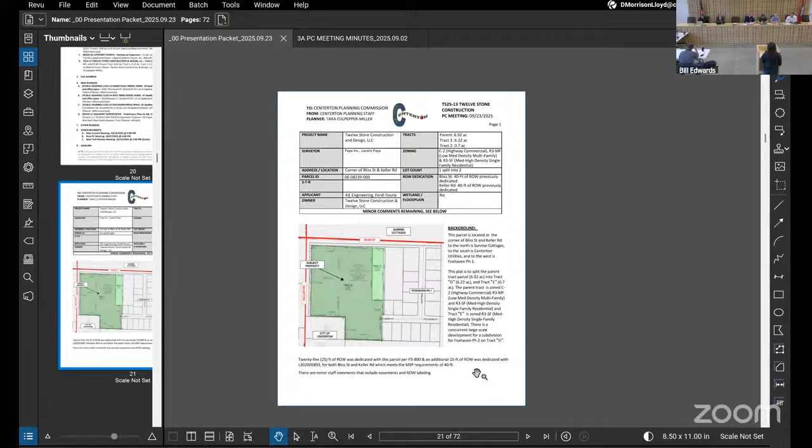They are wanting to use it as a model home and temporary sales office to facilitate sales within the new subdivision for 1 year. They are not doing any structural changes to the residential home, and they are also not going to be converting the garage into sales offices. So it's gonna remain as is. They'll just have people there, walk people through different finishes and things like that that they can do.

It is surrounded by single-family zoning and the Huber Place Phase 1 subdivision to the north and to the west. And directly to the east of this property, it is adjacent to C2 zoning because the parcels right there on Tycoon are commercial properties. They will be open for the model home for potential buyers from 10 a.m. to 6 p.m., 7 days a week.

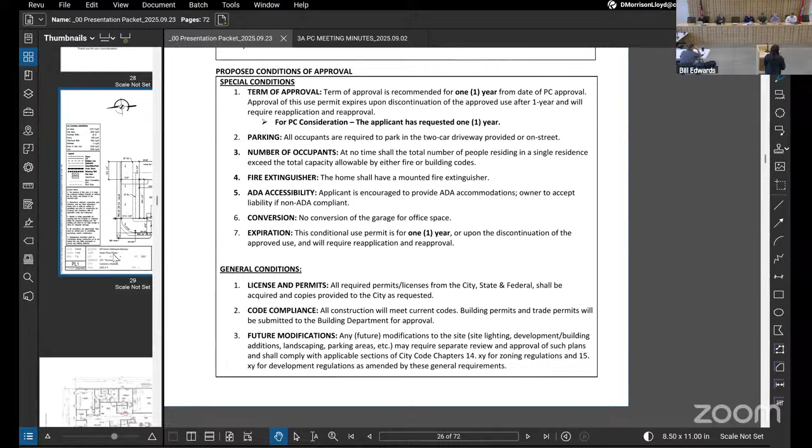Yeah, there's just a little bit else. Is it just considered one office or are there gonna be multiple people working there? We have about 1 to 2 salespeople working. That's about it. How do y'all normally handle the parking? We encourage driveway parking just to keep minimal cars off the street. But we're expecting maybe about 5 people in there a week.

I know we've run into some parking challenges before on there. Well, but people get the opportunity to come and complain, and it can be revoked. So, I agree with you though. But it is just one of the houses. There's not like 3 or 4 of them there. We're trying to reserve the last few houses surrounding the model home as window lots to allow parking.

Any other questions or comments from any of the commissioners before we open up to the public? Then I would entertain a motion to open the public hearing. I'll make a motion to open the public hearing. Second. Motion and a second. Is anyone opposed? We are now open to the public. If anyone has any questions, comments, or concerns in regard to conditional use 2513 for the Huber Place model home, we'd ask that you come to the podium, state your name, address, and any questions, comments, or concerns that you might have.

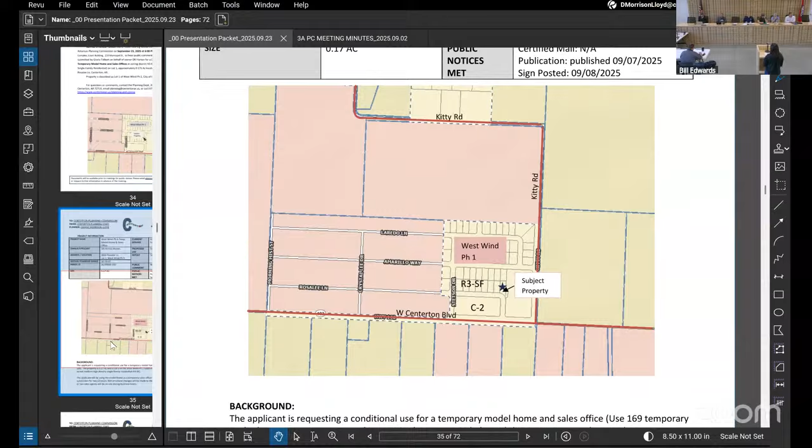Diane? Yes, this is a bit of a rinse and repeat, but they are requesting a conditional use for a temporary model home and sales office. It's located on lot 1 of West Wind Phase 1. It's 0.17 acres and it is zoned medium high density, single family residential. And they are requesting to use this as a model home for 2 years. Like the previous one, they're not making any changes to the interior of the house, and they are not converting the garage to be used as sales space either.

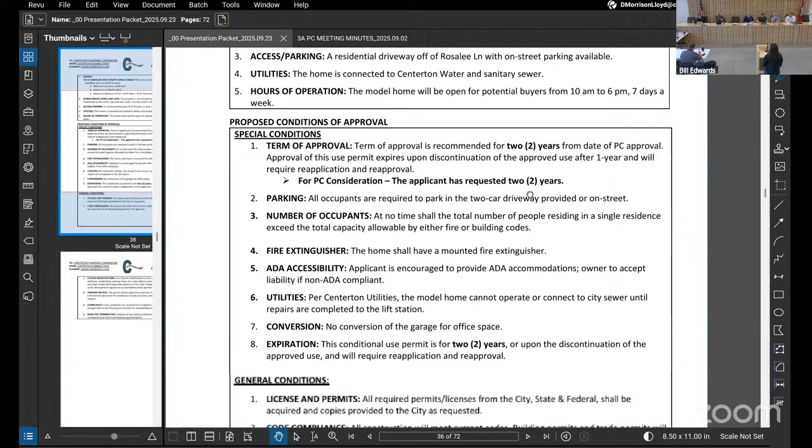So it is surrounded, of course, by single family zoning within the subdivision to the northeast and west. And like the previous one, there is C2 commercial located to the south within that subdivision. Parking, same thing, use the residential driveway off of Rosalee, with on-street parking available. There is one additional condition for this one for utilities. Per Centerton Utilities, the model home cannot operate or connect to the city sewer until repairs are completed on their lift station. Their lift station is currently flooding. So they're having to get all those repairs done before they can use this as a model home.

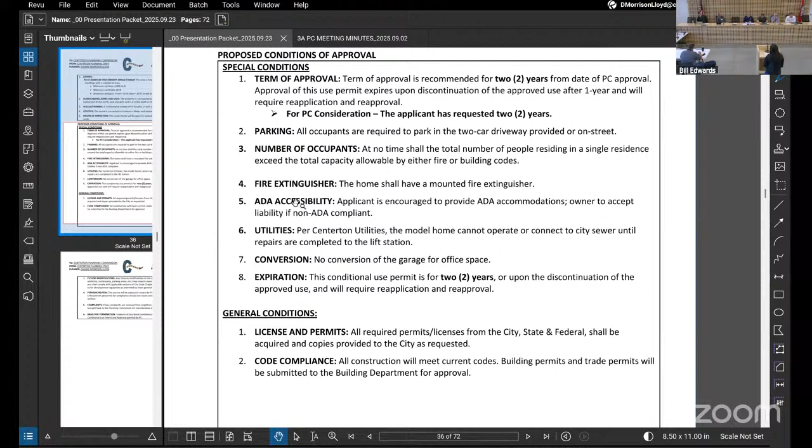And they are requesting 2 years for this particular home. And same hours, 10 a.m. to 6 p.m., 7 days a week, with 1 to 2 people staffing. So my only question or concern on this one: is Stetson Drive completed yet? So yes. It would be platted, right? Mhm. And so my biggest concern or comment would be parking, if there happens to be 3 or 4 vehicles parked there and it's on a corner. And it looks like a 90-degree corner, plus it's at an entrance.

I was trying to see how long that is to the entrance to the street. I wonder if we need to consider maybe restricting parking, if that makes sense. So if it's only 20 feet, and I don't know what that is, it's probably longer than that, but do we need to restrict parking if people turn in? You probably definitely don't want to be parked right in that curve. I think those commercial lots, are they 50 foot? I'm probably guessing, no, I think they're about 150 feet deep. Yeah, let's get a double check.

Because then it looks like there's this little, looks like you got it. Then there's a lift station in that little wonky corner there, and then the large parcel to the right is their pond. Yeah, I just think we should somehow try to limit, does that make sense? Yes. So I think we should, I don't know if it's 100 feet or I don't know what people feel comfortable with, from the entrance.

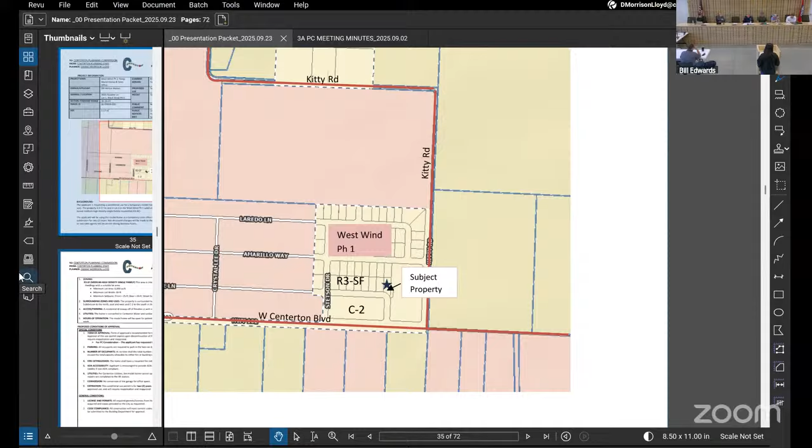We should probably limit. You're not gonna be able to block off the lift station access either. Correct. That's my feedback on that. You all own the lot or lots next door? Yes. Minus the lift station lot. Sure. Well, I say that, not the commercial lot either. The residential. Yes.

Any other questions or comments from any of the commissioners before we open it up to the public? I was just gonna say, I looked down at the plat, farther down there, that lot that we're talking about is 142 feet on the east side. So using that for scale, you're probably a couple 100 feet from that intersection. Okay. Yeah, I just, if 5 people show up, I just don't want, yeah, no, I get what you're saying. Plus it's on that corner, and I know it's probably not to scale and probably looks sharper than it is, but still just want to be conscious of it, I think, for flow of traffic.

If there's no other questions or comments, then I would entertain a motion to open the public hearing. So Joey, I'll make a motion to open the public hearing. Second. Motion and a second to open the public hearing. Is anyone opposed? We are now open to the public. If anyone wishes to speak in regards to conditional use 2514 for West Wind Model Home, the single family dwelling unit at 3010 Rosalee Lane, I ask that you come to the podium, state your name and address. Any questions, comments, or concerns?

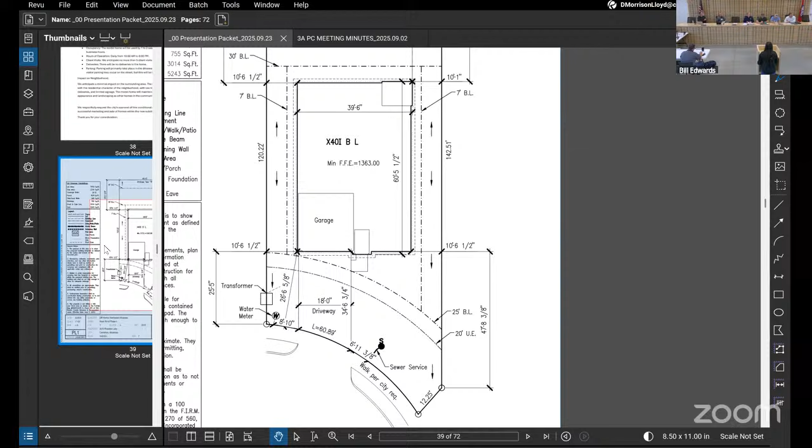Are y'all building out the rest of the residential on this, or do you? The developer is. We purchased these lots from a developer and are just building on them. So they're supposed to be working on that next phase for us. Gotcha, okay, so that's why the 2 years, you wanna kind of roll it. We want to leave it for the future phase. Yes, so we wouldn't have to move. Yeah, that makes sense. So I just want to make sure, so you're comfortable?

I don't know, how would we prevent people from parking? I don't know if it's a temporary sign while you guys are open. I'm open for suggestions and maybe you guys don't think it's a big deal. I just, if 5 or 6, 7 people, for whatever reason, start lining up on the street, if you're 30 foot of vehicle and 6 of them get in there, it adds up. So I was just throwing it out there as something we should think about. Do we draw it at 100 feet from the entrance and then ask them to put a sign up? I'm open for ideas and suggestions, I guess, is where I'm at.

Commercial lots are 150 feet wide, so the lot is more than 150 feet away from the entrance. Okay. Mm-hmm. I see that they could park along the north side of the commercial lots. Yes. Is that a hydrant also in that corner besides the lift station? There's probably, I don't know if there's no parking signs there already, but there should be something that doesn't block them.

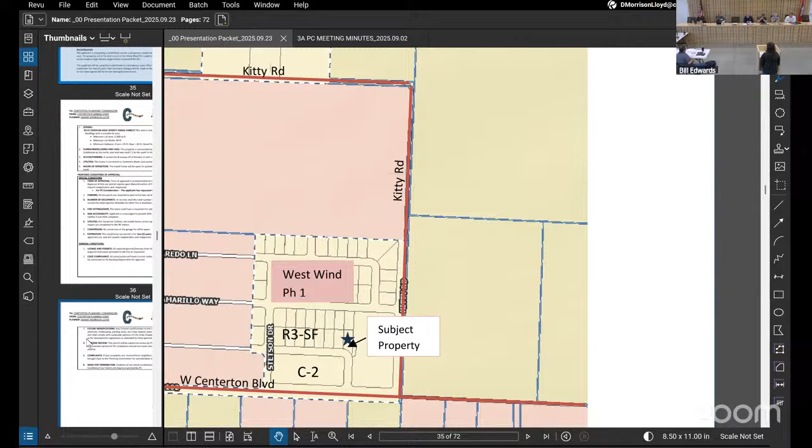Signage too, making sure that there's signage there then. Does that need to be a part of this approval? I mean, I'm comfortable without it. I just think it's noted, and I'll make a note in the approval letter that I send to them. I will make a note about parking and to stay away from that.

So with that, I would entertain a motion for conditional use 2514 for the West Wind model home. This is Joey. I'll make a motion to approve conditional use 2514 West Wind model for a 2-year duration and note that there can be no connection to public utilities until there are repairs on the lift station. You second. Brandon, a second. All right, motion and a second. If you'll do a roll call vote for me, please.

All right, next on the agenda this evening is also a public hearing. This is for conditional use 2515 Fox Haven office space. It is a single family dwelling unit as a temporary office space. It's at 610 Whitten Road. It is zoned R3 single family, and this is lot 14. Give me your name, and then walk me through what you guys are requesting.

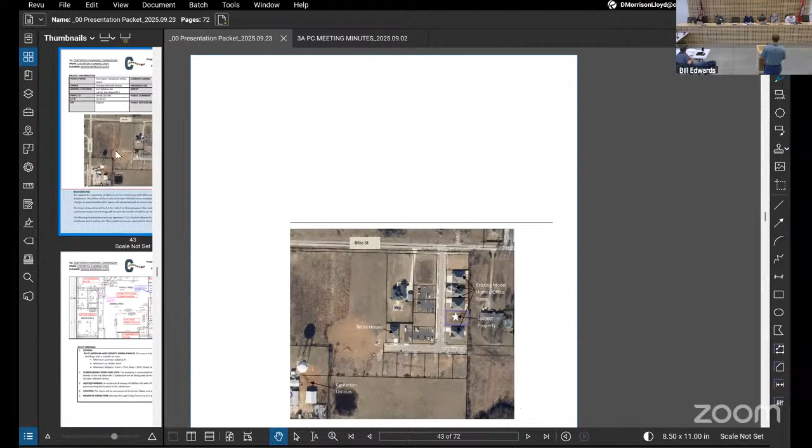The office will be used by internal staff with 5 to 10 employees working on site daily. From time to time, we may host internal meetings with attendance reaching up to 15 to 20 people. No customers will be received at this location. For parking, we will be accommodating staff through our lot driveways and existing paved parking spots. Those have a total of 60 between the two paved parking lots, and with the lot driveways it would be 66 in total. So a little different than the previous two.

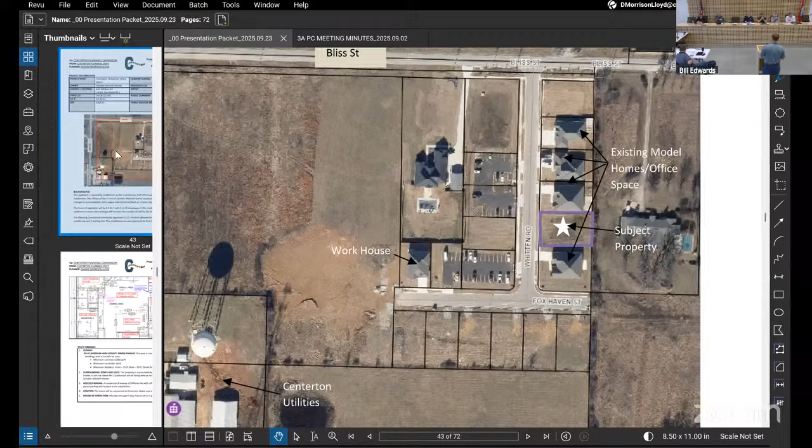So Diane, will you go through the staff report, please? Yes. As Trevor mentioned, this is in the Fox Haven subdivision. It is lot number 14. The office will be home for Schuber Mitchell's staff. In the interior, they are making changes to accommodate office space until it's converted back to a home. I do have a drawing of everything that's being converted included in your packet. Their hours of operation will be Monday through Friday, 8 AM to 5 PM, with 5 to 10 employees in the residential structure. There are 2 conference rooms, and meetings will increase the number of staff to probably about 20 at a time, and no customers will come to the home.

The planning commission has previously approved conditional use 2214, which allowed for 4 model homes and office space, a workhouse, and 2 parking lots. The conditional use was approved for 5 years, from 2022, expiring in 2027. It is surrounded by R3 single family on all sides. The 5 homes currently in the Fox Haven subdivision are being used as model homes and office space for Schuber Mitchell Homes, and staff vehicles get parked in the southern parking lot. It is Monday through Friday hours of operation. And of course, they have the residential driveway off Whitten Road.

And then there are the 2 paved parking lots, which Trevor said can hold 66 vehicles, and both parking lots are lighted. They have not requested a time period for the use. Staff suggests no more than 2 years; I'd love to match the existing model homes. But like I said, right now, everything in this subdivision is being used for a commercial use. And this one will be just strictly office space, not even a model home.

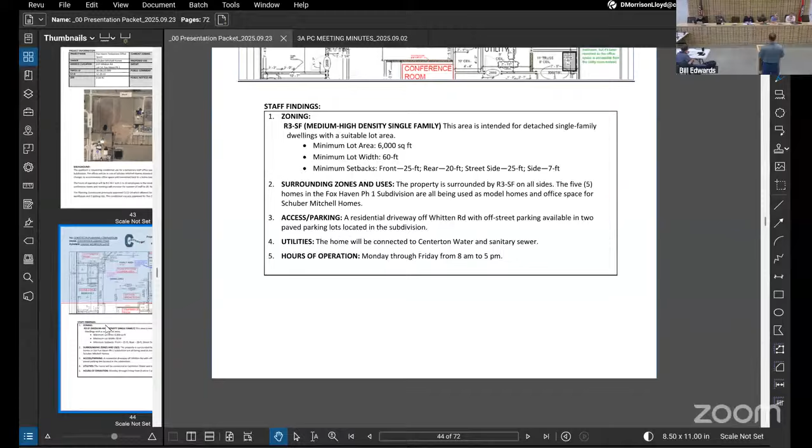So this house is not built yet. Correct, yes, sir. When do you anticipate construction starting? Tomorrow, if we get the approval. We're ready to rock. Okay.

This is all that's done on the subdivision. Sorry, that's what I was about to ask. Yes, that's all that's in there right now. So help me understand a little bit. Is this a commercial property now? No, sir. This will just be an office space that we use. Well, would that be commercial technically? That would be commercial. The conditional use is for commercial use. Yeah, so how does that impact?

We typically see one like standalone, right? Like what we just saw, but now we have a whole conglomerate. So the other existing model home office space that's already currently there, I'm asking the staff this question, are those considered commercial properties as well? None of this is zoned commercial. Correct. They are using it as commercial. In their model homes, they have office space also. They also have a workhouse where employees come.

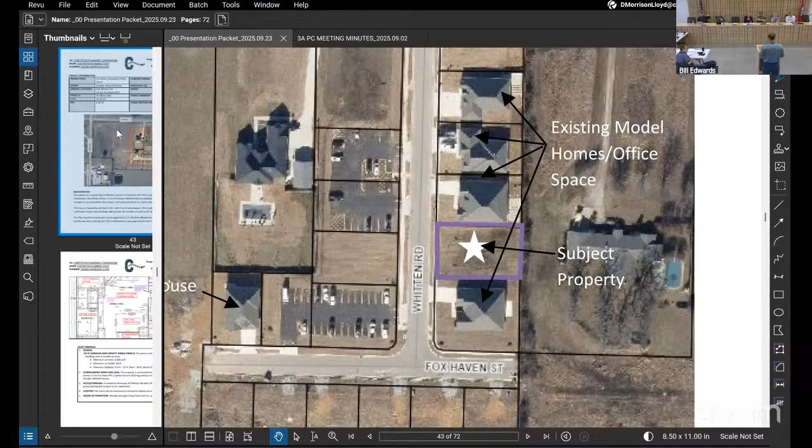Do you have a lot where you keep equipment? Yes, ma'am. Storage? That's the workhouse. So right now we've got multiple spaces that are being used for commercial purposes in a residential area. Yes. Okay. With the model home, historically, has there needed to be a conditional use permit of some kind for that? Anytime for a model home, yes, because it changes the intended use. And we can put conditions on it, whether it's hours of operation, parking or other things.

And so that's the reason that we require the conditional use, along with the fact that if there happen to be issues, then it could be brought before us. But historically, these guys have actually had model homes before in their subdivisions in which they would have a small parking lot. There would be 2 or 3 people working there, like a model home. Now this, in my mind, is strictly office. I don't want to speak for everybody. My thoughts are this is a subdivision.

And there's office space around town, whether it's Centerton or other places, that exists today versus waiting 3 or 4 months for construction of a property that's strictly driven towards office that doesn't accommodate normal parking. If we were going to build an office space for 20 people, then we would require a certain amount of parking for 20 people along with some other things. That's just me speaking. But I will open it up to the other commissioners for questions or comments before we open it up to the public.

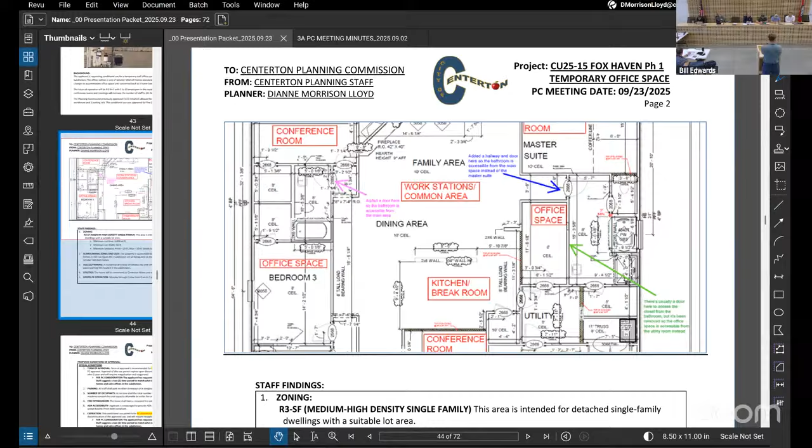I'm wondering, would fire marshal sign off on something like this? I bet Paul's excited. I can see it.

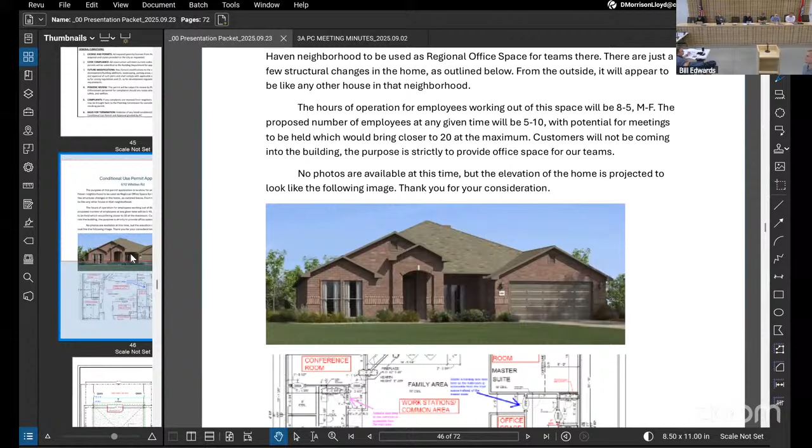So the way we view this is it's a business occupancy. It's under 49 occupant load, so the code doesn't really address it. The only thing that's required is a fire extinguisher. They don't even have to have exit signs and emergency egress lighting. Even when there's 5 right next to each other, they're independent buildings. Now, if they were attached, that would be obviously different. But since they're separate units, we view them individually.

Have you all had any issues with that? Have you had any issues as far as access? No? Not in this area, other subdivision. Any other comments before we open up to the public? We'll have more time, Brandon, don't worry.

Question. Is there any intent to look for commercial space and turn these back into residential at the end of 2027? Yes, ma'am. They will turn back into residential. We're in active talks right now on a commercial space along I-49 that we're looking into, that whenever 2027 comes, we'll all be moving to.

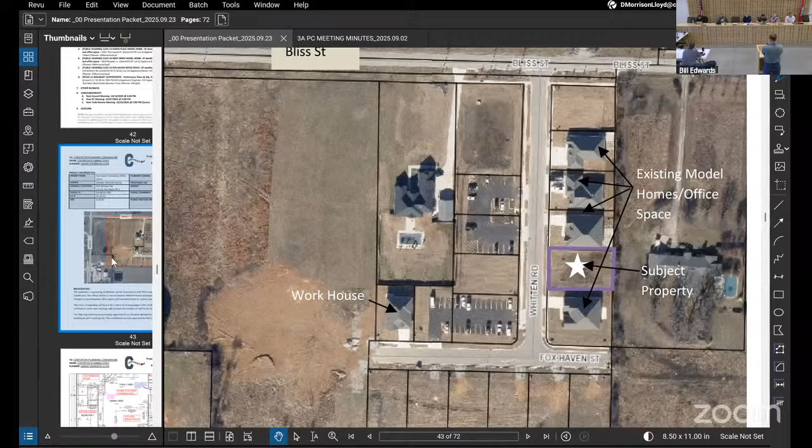Well, usually we look at the impact on whether we do individual mailings. We probably should have done those 2 since they're adjacent. It wouldn't really affect anyone else there, but I think we looked at it that they own all the lots. And who's the developer across Bliss? Gosh. Yeah, the Skyline Cottages. They own all the stuff to the west. That'll be Fox Haven phase 2.

How many total lots will be in this subdivision when it's all said and done? Do you remember that? Is it just those? One is a detention. Right. The front one's a detention. Hold on. There's 18, I think.

I think what I'm struggling with is model homes with a couple of staff there manning that is typical. And we vote yes, and we move with it. But even if I didn't know their circumstances, someone coming in and saying, we want to put a home in there and we want to office 20 people out of it, I don't know that I would say yes to that.

I wanna help because it sounds like y'all are in a bind. But at the same time, I don't know that I would vote yes for that if I didn't know your circumstance. Am I communicating that clearly? Yeah. I think, with these being their model homes right next door, they've got a vested interest to keep it nice and make sure there's parking and it's not a mess, because it's affecting their potential buyers. So I think there's some security for us in that way.

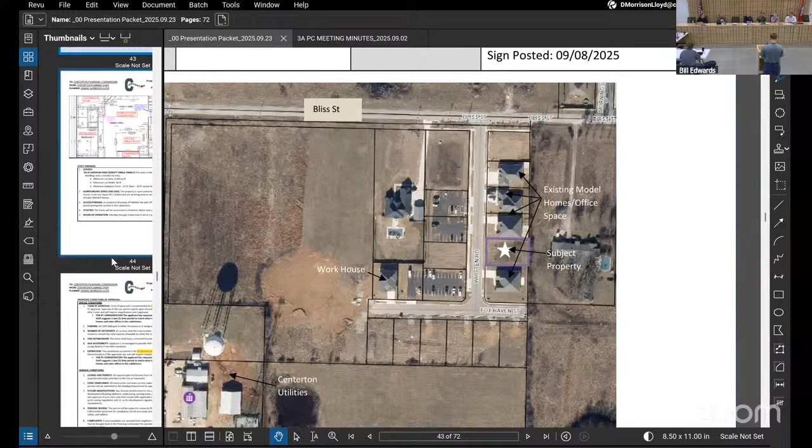I don't necessarily disagree with Brandon on the precedent either. But we'll all get a chance to vote here in a minute. Are there any other questions or comments before we take a vote? Then I would entertain a motion for conditional use 2515, the Fox Haven office space, single family dwelling unit as a temporary office at 610 Whitten Road.

This is Joey. I'll make a motion to approve conditional use 2515, the Fox Haven office space, with the duration to expire with the existing conditional use on the existing structures on February 7th of 27.

Second. I have a motion and a second. If you'll do a roll call for me, please. Joey Engel, I'm going with yes, because the entire subdivision is essentially locked down until this conditional use is up. Devin Murphy, yes. Tony Davis, yes, with the same reason that Joey stated.

Brandon Swoboda, no. Out of precedence. Curtis Ramsey, yes. Jeff Seifarth. And I'm a no as well. 4-2. It passed. Thank you and good luck. Yes.

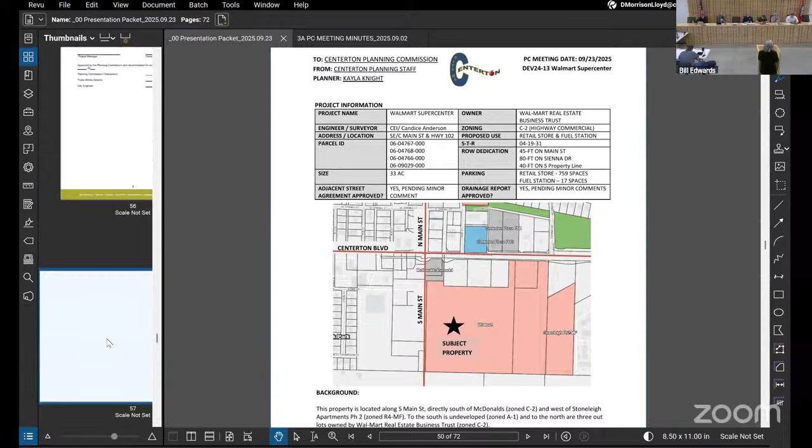The applicant is also proposing a fuel station and convenience store with a floor area of a little over 1,600 square feet. This property is zoned C2 highway commercial, with a front setback of 50 feet, street and side setback of 10 feet, rear setback of 25 feet, and C2 zoning does allow both fuel stations and retail stores by right. Both buildings meet setback requirements.

For utilities, an 8-inch water line will be constructed on the west side of the proposed Sienna Drive to service this property, and an 8-inch sewer line will be constructed on the east side of Sienna Drive to service this property. Additional utility changes may be needed in the future to coordinate utility relocation for the ARDOT widening of Highway 102, but Malcolm was confident that any of those changes wouldn't require site design changes, just little shifts in some easements, so he was fine with it coming to planning commission for preliminary approval. He does have some other minor comments on the plan, but they were substantially approved by Centerton Utilities.

As a note, this project will be placed on the sewer priority list based on the date of PC approval, the date when all staff comments are addressed, and then when all ADH comments are addressed. Just like every other project we've approved that's been held up by the sewer capacity situation. So that's how we've been handling it. We should have a list available soon for the public.

Bear with me, the drainage, floodplain, and wetlands is going to be lengthy because our city engineer's not here, so he provided all of this wonderful information. So, the Walmart development has been reviewed as meeting the requirements per the Centerton Drainage Manual. The site will consist of 2 ponds on the east side of the site near the extension of Sienna Drive, and will discharge to the northeast corner of the site, where flow will go under Highway 102 to the Centerton Pond and eventually continue northeast through McKissick Creek.

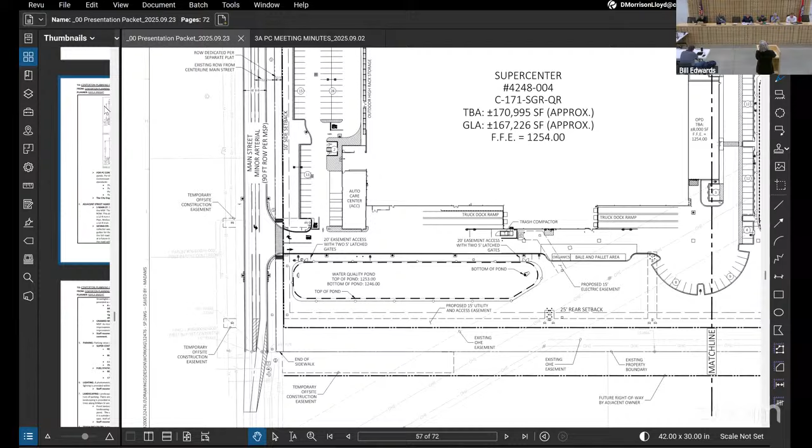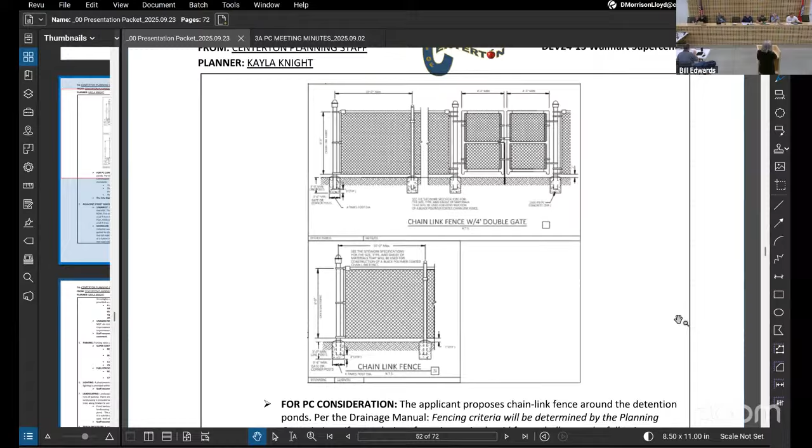Both ponds are designed with safety fencing around the ponds with access gates as required per code. The design for the fence in the drainage manual is still set as something that the planning commission can set. Current proposal is for a 6-foot silver chain link fence as shown in the details. This is acceptable for engineering purposes, but it's up to you guys to determine the actual design criteria. So that's up for your guys' consideration. As planning staff, we would recommend at least black chain link, if not something more stringent. The city engineer has approved the drainage for this development.

For the adjacent street agreement, South Main Street is designated as a minor arterial with a planned right of way of 90 feet per the master street plan. This development will dedicate an additional 12.5 feet to provide the total 45 feet of right of way. And then they will develop the road to provide the 38 feet back of curb street section, including a 12-foot turning lane, 2-foot curb and gutter, streetlights, and street trees. And then per the master trails plan, McKissick Spring Loop is planned along South Main Street. So this development will construct a 12-foot trail along their property.

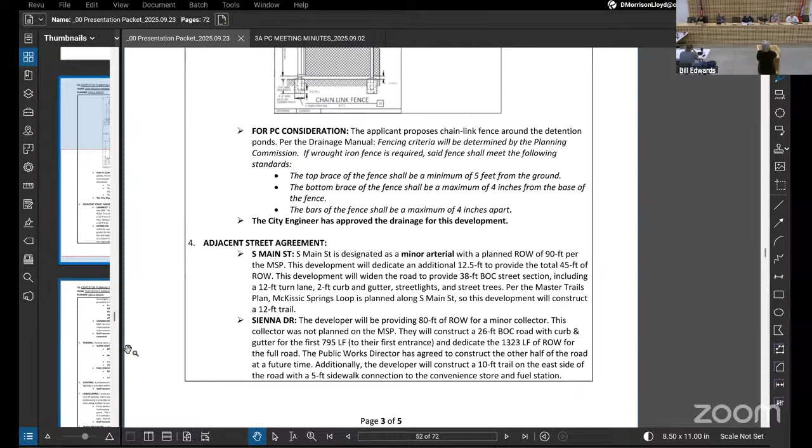For Sienna Drive, they're doing an extension of Sienna Drive along their property. So they'll be providing 80 feet of right of way for a minor collector. This collector was not planned on the master street plan. So they'll construct the 26-foot back of curb road with curb and gutter for the first 795 feet, which is to their first entrance, and dedicate the right of way for the full road all the way down to their property line. The Public Works Director has agreed to construct the other half of the road at a future time.

Additionally, the developer will construct a 10-foot trail on the east side of the road with a 5-foot sidewalk connection to the convenience store and fuel station. Streetlights will be provided every 200 feet and at every intersection. Street trees will be provided as shown on their landscaping plan.

Just as a note for you guys, a signal will be installed at the intersection of Sienna Drive and Highway 102. For ArDOT, additional improvements to Highway 102 are required to allow for this signal, including all of the entrances between Sienna and North Main Street becoming right in, right out only entrances with a painted median, I believe. And those preliminary plans are in the Dropbox. They've been in there for the last week and a half for you guys to review.

And then there is an unnamed minor collector along the south property line. So they'll dedicate 40 feet of right of way to meet the master street plan. As recommended by the city engineer and public works director, no other improvements or fee in lieu are being proposed for this road due to the number of improvements being completed on Sienna Drive and North Main Street. Staff recommends approval of the adjacent street agreement pending one minor comment.

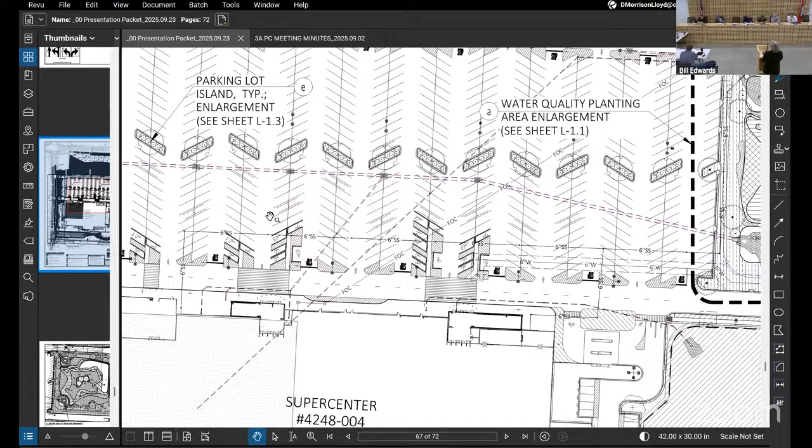A photometric plan was provided, and adequate lighting is provided for the site. Parking lot lighting is provided within islands and on the building, as well as along the roads and at entrances. Landscaped islands are provided in the parking lot, about every 10 to 11 spaces to break up the long runs of parking. Please keep in mind this development was submitted before Title 15 got enacted, so they didn't have the full code to have to adhere to. I think they did a pretty good job though. There are a few areas of 12 to 14 runs of parking without an island. Additional landscaping is provided within detention ponds, preserved wetlands areas, and along the streets.

The trees along North Main Street are provided outside of the right of way due to utility conflicts. Pond landscaping is shown per the landscaping plan. There's no additional pond landscaping beyond the extensive requirements for the marsh pond on the north pond. And then the south detention pond has trees shown along the south and east sides where it's outside of the 100-foot easement. No landscaping is shown on the north and east. And then half of the east side pond does not have landscaping due to the stormwater.

Staff recommends approval of the landscaping plan. A trash enclosure will be provided for the fuel station and will be made of concrete masonry blocks with a metal gate, and that elevation was included in your packet. The supercenter will have a trash compactor on the south side of the building. There are minor outstanding comments on the plans and adjacent street agreement regarding labeling, so we recommend any approval given be contingent on staff comments being addressed. Happy to answer any questions.

What have we got? So there's about 9 drives on the north side of 102 that'll change to right hand only. Is that right? Yeah, that's what they've been working on. That's what ArDOT is requesting, that they're only gonna be able to turn at Sienna Drive. It's a right in, right out. You can't even turn into them except the bank? Was there one that they could turn into? Oh, wait. If you're heading east, you can turn left. It'd be a left out.

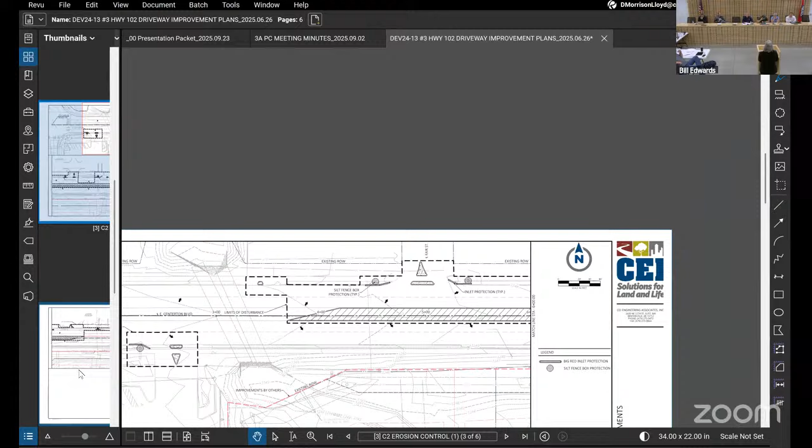I think they can turn at Fair Street. Was there one place they can turn? I thought it was a street. Fair Street, I think they can turn at Fair Street, because Alan came over and talked with myself and Chief before he approved. Unfortunately, that back road, I don't necessarily consider it a street. I know it somewhat is. It's actually a street, but they're looking at making improvements to it also.

Candace, thoughts on the color of the fence other than a gray metal fence? My own personal thought is, we're working with what is applied in the Muni code. No, it's up to the PC. So you're asking about the chain link versus the wrought iron? Yeah, basically. I'd like to see something. I don't know that we specify wrought iron.

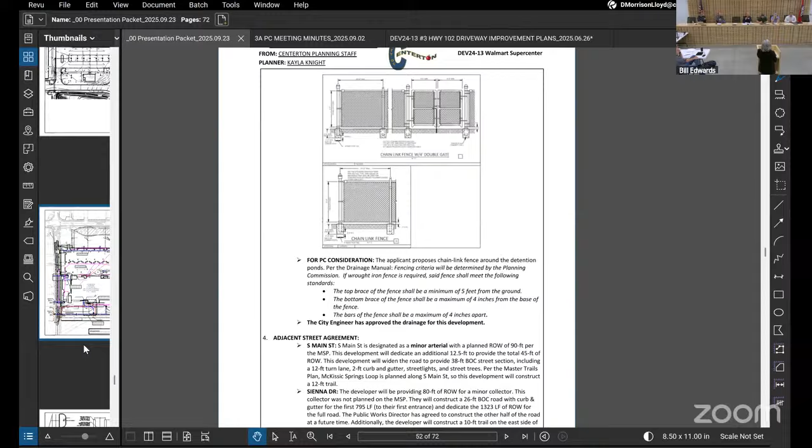In the wetlands, we do have significant shrubs and trees, so it helps to enhance those areas a little bit more. I don't think we're necessarily talking about screening, just the look of the fence. Paint it black, it just disappears in the landscape. Black chain link sounds crazy, but you can go to Sam's Club and see that. I don't think chain link. Let's keep it pretty. Only thing with the wrought iron is sooner or later somebody will hit it with a mower or a truck, and then you've got a big damaged panel, if they back into it.

It doesn't necessarily have to be wrought iron, but it can be one of the decorative vertical styles. Just throwing that out for consideration. Would you be open to a combination depending on whether it's seen or not seen? So let's say it was all black. Some could be chain link where it may be more hidden versus decorative where it's more visible. From the roadway, yes. Definitely visible. Is that something that y'all could live with?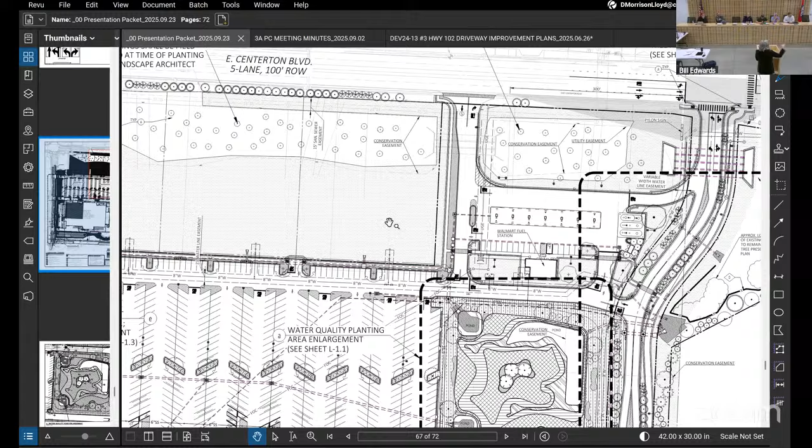For just the areas with the fence lines, and not the wetland adjacent to 102, because we did not propose fence at those two. Just whatever's required. Just where you're showing: the two ponds and then the pond diversion on the side. We're just saying decorative, saying black. Does that work? Try to get the whole side up here for you. I'd say black. Keep it pretty.

All right, I gotta ask. Thank you for the islands in the middle. I understand the striping by all the ADA areas down on the south side. I totally get that. But what's the thought on just striping the ones on the north side? Would a curb not benefit and add some protection to the signage and the lights that are proposed in there? I don't know specifically which ones you're talking. The ones on the north drive, they're all striped. Between the north-south parking and that head-end parking, those where your cursor just was.

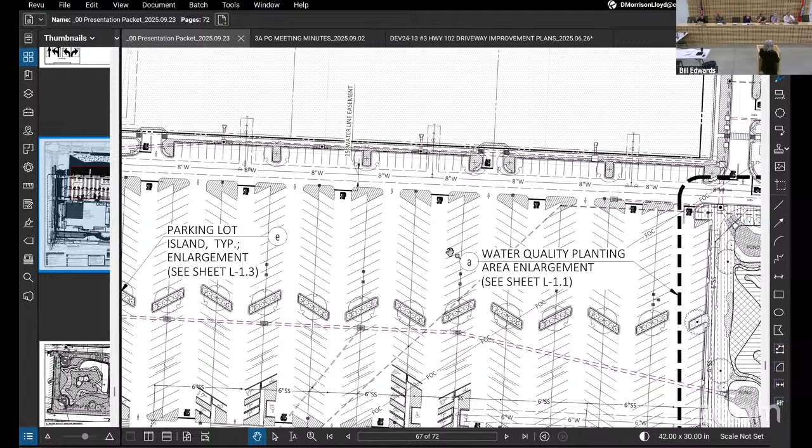The planning staff agreed with our islands because we previously had a few random islands on the north side and the south side, but in order for us to add the additional parking and expand our parking lot, we just put the landscape islands in the middle. It was more of a breakup for the sea of pavement along the parking lot. I just think as your main drive in off of Main Street, that would look a lot better. Well, they originally had come with that, and y'all talked them out of it? Yeah, it was either ends or in the middle. Not necessarily, in order for them to get their parking spaces.

I don't have a problem with how they have the parking design at all. Maybe it's just my opinion, but I think it would look better. That's all I'm gonna say. I kind of like it clean, striped on the ends. You would prefer to have landscape? Correct. I think it would define that drive. It's just painted right now. Oh, okay, I'm following you now. That's painted, not landscape. The only islands are those skinny ones in the middle. Thinking about people cutting the corners too, and visibility for people driving out of that parking lot. You could plant your trees where they don't have limbs way down here.

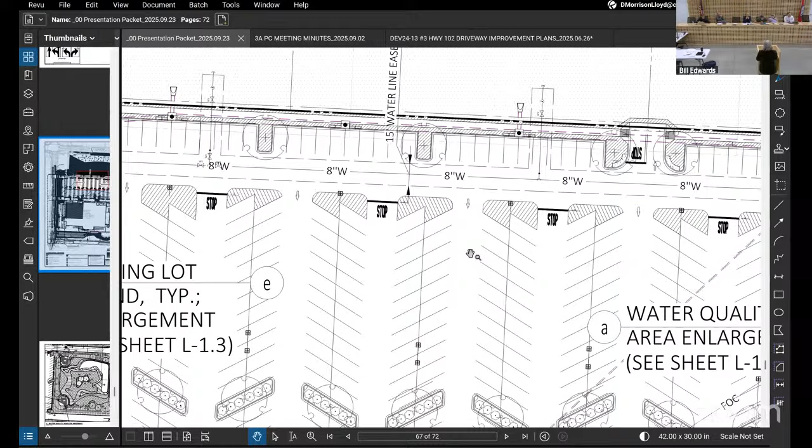One thing that they had proposed before is every other one, so that it kind of defined it. I would be open to that. I think that would look better than the whole row of stripes. I agree. This is under the old Title 15 code. But the old Title 15 says we can; it does require parking. Yeah, you can require. I'm open to every other one. And frankly, on the south, I completely get it, for pedestrian ability.

Hi, Will Kellstrom here on behalf of Walmart. I've talked to him about this landscaping issue, and I think I talked to you on the phone as well, Joey. Earlier we had them alternated, and I did ask why can't we just turn those stripes into grass? If you leave them exactly the shape they are, some of them will be so narrow that they'll be difficult to plant and may not even look that good. What if you round them off and make them square? Then we're cannibalizing spaces.

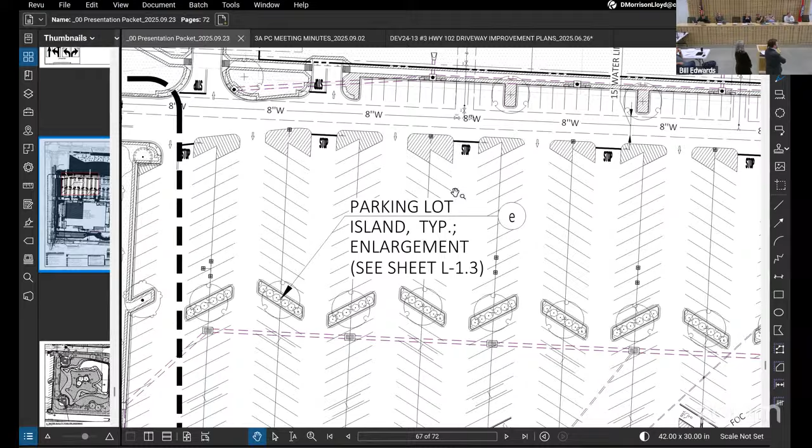Can I interject here? I've done civil site design for 20 years. The only thing you're gonna do is curve the hard 90-degree edges on the interior of the parking stalls, where you would turn into it. You're not gonna lose any stalls. You put like a 3-foot radius on those hard points, and they've already got them radiused on the outside edges. So I really don't think you're gonna lose any parking stalls. Walmart also maintains internal policies about how they want their parking for safety and operational efficiency.

Well, I mean, I'm just saying, it's more difficult to, trust me, I've on multiple occasions said, why can't we just plug that thing in there? No, so we worked through a bunch of different scenarios with this, and in order for them to have landscape islands up there on the top that look nice and are efficient to maintain and don't die, we will have to cannibalize some parking.

How do you not have issues with the smaller ones in the middle if you're saying these are too small up top? And they already came with these to staff, I think, completely curved on the top. So that was the original ask. I think every other one, I think that's a fair ask. Talking about on the south side, that point in the middle of the island. When you make that a radius, is that what you're saying is the problem?

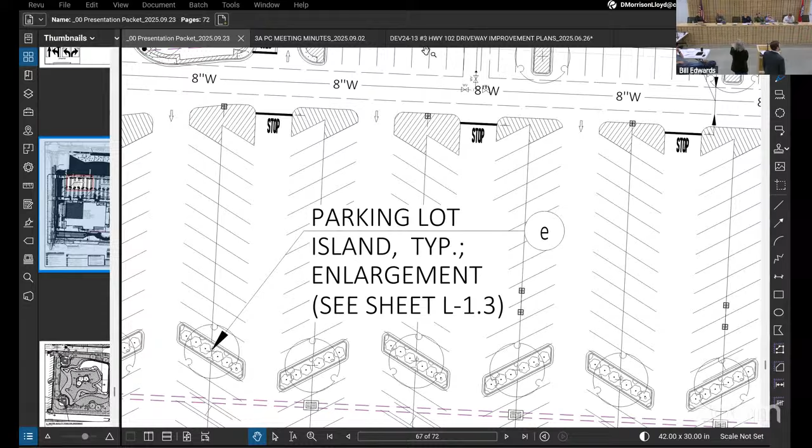We did add additional landscape to the perimeter of the site. Appreciate that. I saw, yeah, it looks good. It replaced the sea of pavement, and we tried the best we could to enhance the exterior. And I see that. Y'all did good. We actually added additional landscape even after our last meeting relating to these landscape islands. That's good. Some of those islands, I can see them being a maintenance concern. For sure. We can keep the small ones striped.

I think the other point would be that Walmart also has certain aesthetic standards that they want to abide by when they do things like this. And I don't know that those jagged landscape islands, simply sticking a curb around them, is something they'd want to do. So we'd basically be reconfiguring this thing, and if there's 9 of those and we do every other one, we'd be eating 6 or 7 parking spaces that we're going to have to stick somewhere else.

You're 19 over already, so that'll work. Simple math on the paper says you're 19 over already. And green space wise, the percentage of green space, there's a ton because of the conservation. Yeah, because of the conservation. It does look great. Props to y'all everywhere else. It does look amazing. So think about this, I think we're open to compromise.

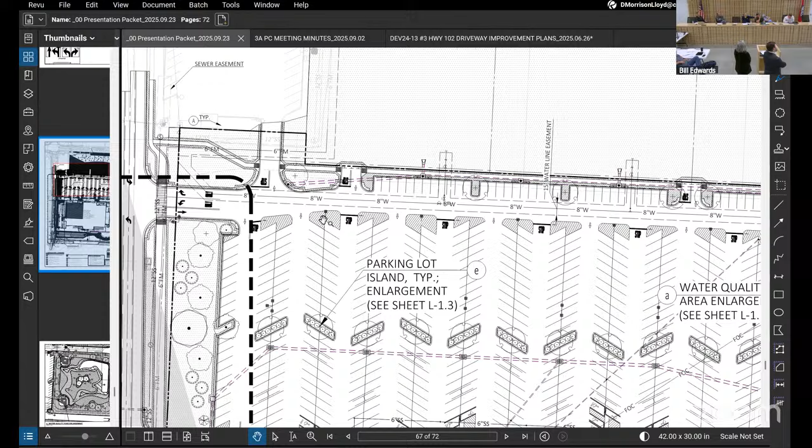What about the first 2? As people enter, you've got the trees on the left along Main Street. What about those first 2? Be traffic concerns there. I think it would help traffic because you're actually changing the direction. It looks like you got a taper going on in that drive lane, is that correct? That's correct. We do have a taper, but at that stop bar, if there is landscape, it would block visibility. Obviously you can't put it in the sight triangle when you're stopped. So we need to pull it back so it doesn't blind people.

You're asking for a redesign of the parking lot? Are you asking to remove some of the parking stalls? I think you can keep what you have and just put some radius on those corners, offset the line, show it as a curb, and show some landscaping, and you're good to go. Y'all were saying that that's not acceptable and that's going to change the parking.

So I wanna be clear. I don't want to come off as saying that we're not willing to look to find a compromise. What I'm instead saying is that sometimes what seems very simple to everyone else gets met back with, we can't do that. So it's,

You want the actual site plan, Candace? Please. Let me get to it. Going back on, let's just zoom in on the parking. Yeah, let's just use an example here on the entrance on the west side of the front portion, right there by the stop sign. Yeah, that's fine. Let's zoom in there.

So Walmart standardization, we usually have a 2-foot concrete buffer on our islands for that purpose of traffic going over the curbs. If we were to add that, more than likely we would have to add some of those concrete buffers there and some of those islands. But it could be a compromise. We'd have to speak with our client about it.

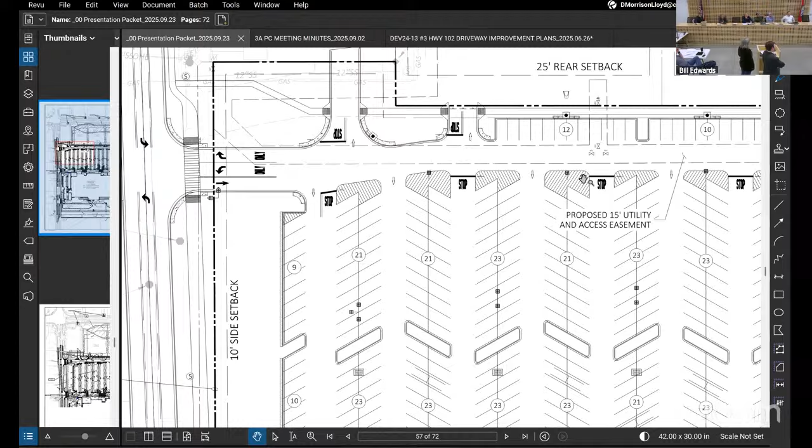You got some bigger ones, right? Like the one next to that and then the fourth one down. I understand the small ones where that would totally eat that up. Even if you came back with two additional landscape islands. I'm just trying to, you said big one, so I'm just trying to do the math.

There'd be a little bit of concern there in this area here on the east side, because there is a French drain. And there's also sanitary sewer and another drainage pipe in this area, but we can compromise further for the east side. Yeah, that's a lot of utilities in this area. Totally understandable.

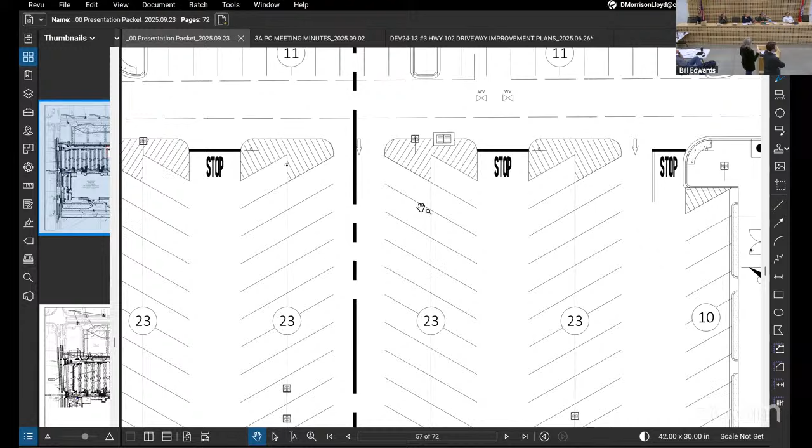The little buffer that you're talking about, is it just east of that other stop bar to the right? That's an example of what we would do, just in the corners. Yes. Another example would be just up there by the fuel station as well, with the radii of the corner there. Can you see if you could squeeze a couple out of the larger islands? I think that's all we're asking for.

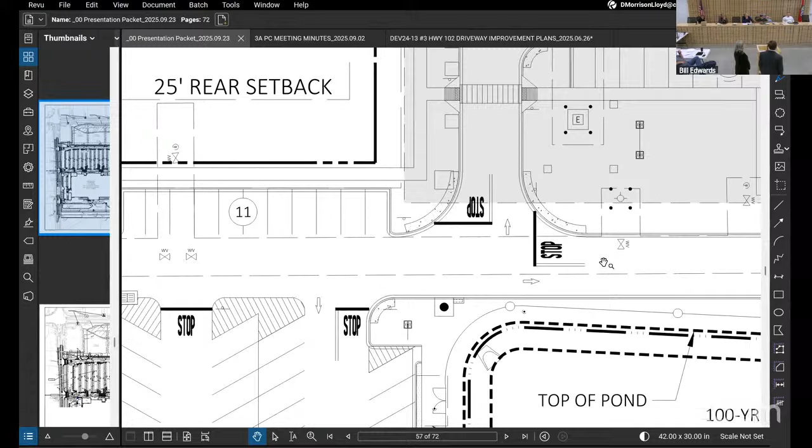So, as much as we do not want to delay this again, stuff like this is stuff we have to go get permission for. I don't necessarily feel comfortable saying yes to anything tonight. I guess you want to table it then? I think we'll have to while we go and look for a solution. And again, it's because of some of these standardized things that Walmart has that it makes it difficult for me in particular, not being an engineer, to go, sure, we'll throw one in right there.

When y'all had it the first time, were those northern islands significantly bigger when y'all brought it in? I think, now Candace can probably remember this better than I do, but I seem to recall that they were alternating, and it was basically the trade-off between one at the top, one in the middle, alternating top and middle like that. Yeah, we alternated, end caps with islands on each row, alternating.

Your question was, were they larger? No. We had to accommodate less parking. We had a different footprint at that time that was shifted in a different location. For the building? Yes, and it changed the parking lot overall, and when we had to accommodate your previous request on these landscape islands, there was a big shift in our footprint, in addition to more parking stalls as well. So we had to cram it all in as much as we could. I can pull up the old site plan for reference. I don't think it's gonna change our decision or anything like that.

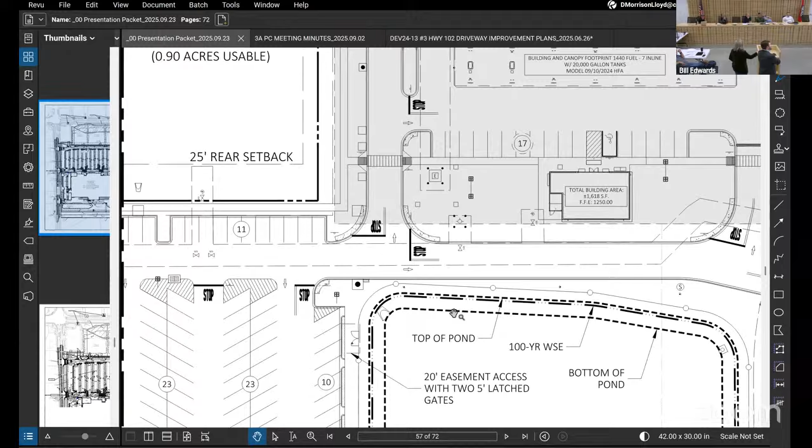Y'all mentioned warehouses? I didn't see that. There's a storage for .com, for delivery. Yeah. I was just, in terms of... Yes, I mean, I got you. It's not like a Walmart warehouse. It's accessory to the grocery store usage.

Is it like the north side of Bentonville, or not that pronounced? Which, across from the old home office, where they built the warehouse? Is it similar? No, what we're talking about here is the OPD on the east side of the building. Okay. That's all pickup, and that would be considered the warehouse. In addition, we also have the tire shop that would have some warehouse.

So the other solution I can suggest is, I do believe we're the last thing on the agenda. If you can table us for 10 minutes, we can make a phone call and try to do that, if we want to solve it tonight. Yeah, I'd love to get it settled, for us to get this tonight, because we don't want to delay it any further than it has already been delayed. If we approve it and let staff, and they don't get the islands, then we're going to end up back here anyway. So if you can make a 2-minute phone call and come back.

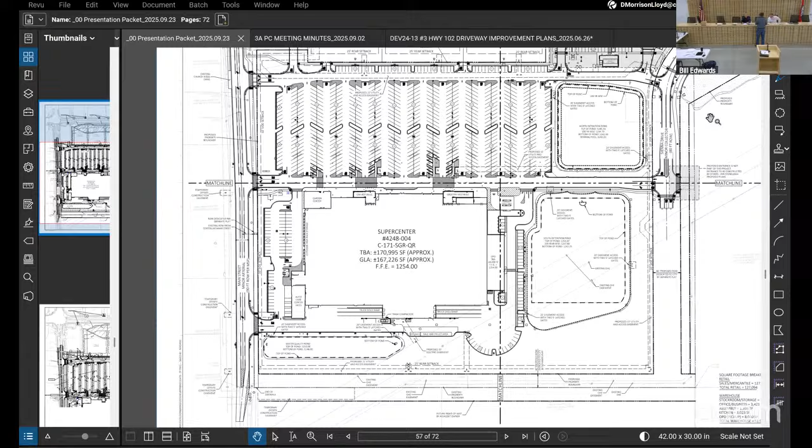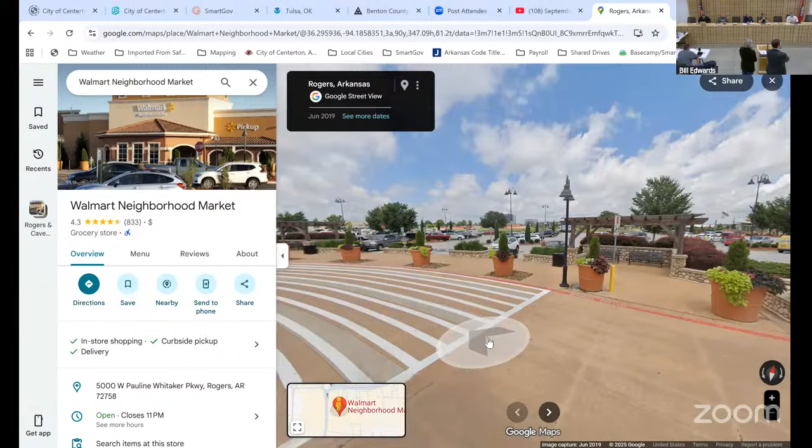No, not just on the islands. Yes, the standards, it's the width. It's also what we require within the site, like the landscape buffer. There are certain standardizations that we have. Besides that, also the radius. I had some information here I will share with you real quick. Obviously, it's not the size, because we have the smaller ones internal, and those are way smaller than the striped areas on the north. Oh, there we go. Harder to get compaction on islands.

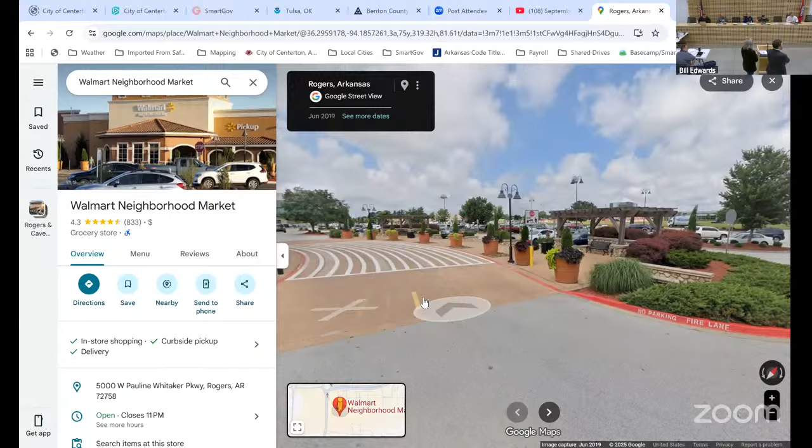Oh, is this the Rogers? Oh, yes, this was actually out of the ordinary. This was not a typical Walmart store. We did the best we could to accommodate to Rogers. That's great. Let's do that.

Because it's close to people to make decisions. I mean, I can't argue with y'all that I do see an asymmetrical island right there, but I also am sitting here telling you that I can't approve that without anyone, without permission. That's fine. Totally fine.

So one of our options would be to approve it. Yeah. With the contingency that you make additional phone calls tomorrow or tonight on your way home, or whatever that might be. And say, well, gosh, they showed me some pictures. I didn't have any great defense because of that.

It'd have to be in Rogers, and I'm sure if we Googled, we could probably find many, many more that are out there. And I don't think we're asking for anything crazy, because again, you're over the parking spaces. So if you lose up to 19, then you're still within our guidelines. And I don't know if that gets you to the 4.5 or 4.2, whatever that number is.

So we could technically approve it, and then you don't have to come back here if you call staff and say, gosh, worked with the team and we came up with 2. And I'm just picking a number of 2. You could go to staff and say, we're all good, and then, you know, we don't see you again until the grand opening.

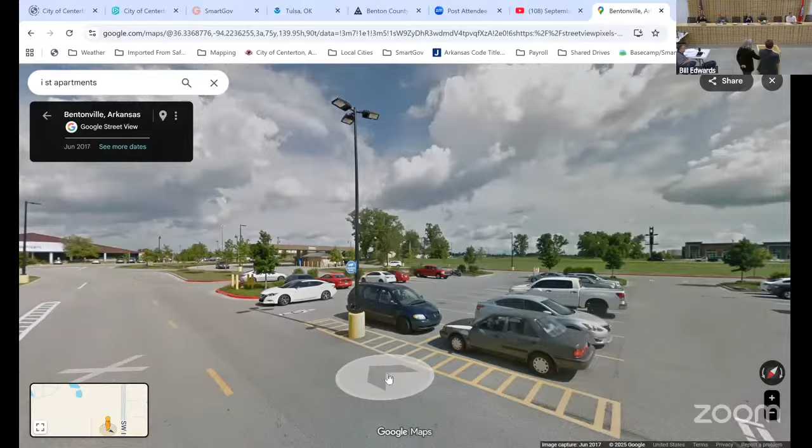It would, I mean, the condition to go back and confer with our client and then go talk to staff, I guess it just depends on what the language of that condition is. If it's, you know, we're gonna agree to provide exactly 7 islands, I don't know. I don't know that we necessarily have to have... I don't think we have to specify a number. Now, we can.

Whether we pick 2, I don't think half is the right number. And we may all disagree, so it may take us more time than it took you to make a phone call. Because I do think the larger ones, which there's only 2 or 3 of, are probably the best option. We'll get more islands than that Bentonville Walmart. They're very short rows. And then there's a big landscape.

Could we approve? I mean, Joey, are you like, we need to set a number? I'm afraid if we don't, they're gonna come back with 1 and that's all we're doing. We could set a minimum. We could say a minimum of 2. We could do it that way, and then that gives them an option. I don't know if that's agreeable or not. Caitlin, Maureen, do y'all have a recommendation?

There are 6 or 7 sets of parking rows. You could add these 3. There's 13 striped islands on that top. I've got 6. Yeah, we got.

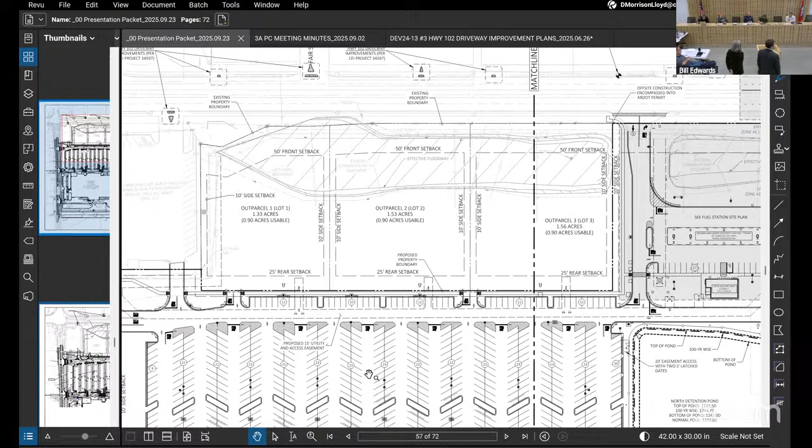I don't know if this is reasonable or not. There's 13. We were talking about half, rounded down to 6. And hopefully we can hit that. That's just my idea. Those 4 on the easterly side, we have to be considerate about because of the utility. I will also say there's just 1 with a trench grate in it.

Let's just be clear though. So I think there's 1. Utility planting. Let's be sure. Let me see if I can find it real quick. Okay, but that's only 4 that they can't do. So either way.

So could you go to 4, Joey? I guess. Why would I go to 4? There's 13. Surely we can find 6. Asking. It's, if the condition is to...

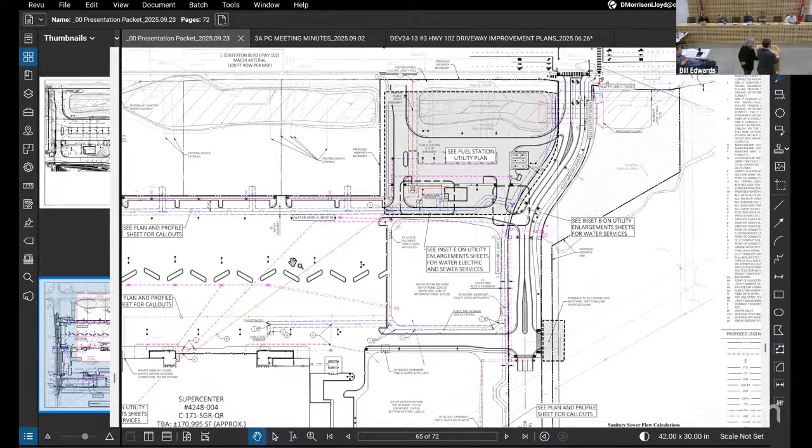The applicant must install X number of landscape islands, my concern is that we're gonna be right back here again at some point with a redesign, asking for a modification of the large scale. I think we're just trying to find a way that y'all can get approval contingent upon this. And obviously, there's not a desire to add landscape islands from your client's side or y'all's side. And so I'm worried about from the city side not specifying that and not getting something that meets the intent of what we're asking for.

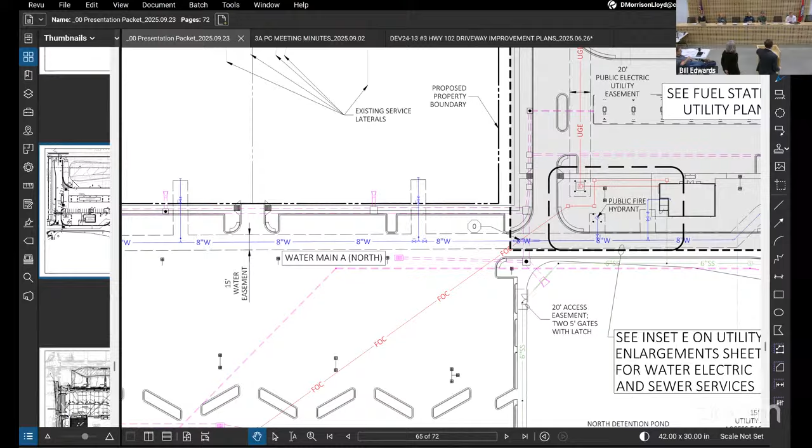This proposal that you're looking at was our attempt to meet the intent of the comments of the last time this was in front of you. Pretty sure when we came with the variance, we were talking about island caps on the end and then an island in the middle every 11 or 12 spots, right? So we've come back with half of that. Well, our understanding was islands every 11 to 12 spots, and that's what we've come back with.

I'm on 6. Yeah, that's y'all decide if that's fair or not. What's that thing? It's all up to you all. Oh, wait.

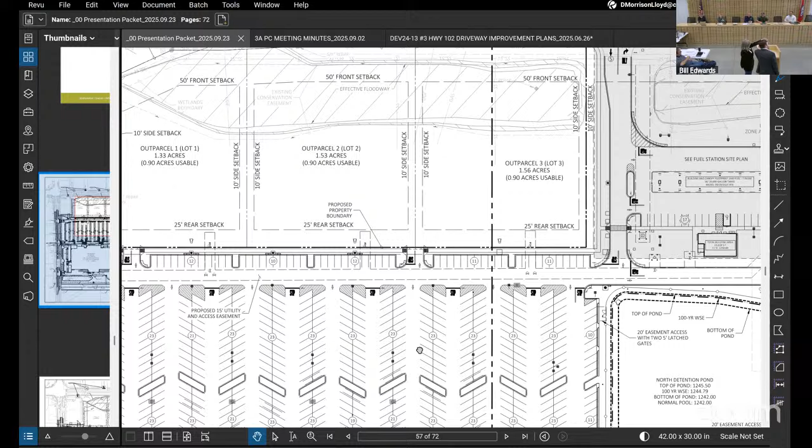I'll remind you guys that this is kind of the keystone to the beginning of our new downtown. I know. That's why we should get all of them. I don't think it's unreasonable. It's not the one in Rogers, and this is our focus of our town that we're trying to develop. We're arguing over islands. If we can make it nicer, that's the way we want to go, because this is our town's focal point. Start and we just have a parking lot. It doesn't give the message that we're trying to.

Sure, I think some of y'all have worked with me enough to know that if I had the ability, I would. I'd figure something out right now. I don't. That's the problem. And I really did like Joey's point about defining that drive in some way, so that people aren't driving over site parking, because it is a key drive through there. It's the main entrance, especially because you'll only be able to access those 3 outlots through this drive as well. And there are landscape trees in those islands as well. Yes.

Well, if it is between a condition to find somewhere to add 6 and a tabling, or a denial, I think we probably just need to table them, because I think a condition that requires us to add a certain amount, again, I think it's possible that we're gonna end up back here asking to amend the plan. And we certainly don't want to get denied either. So I think we're headed towards a tabling. That's what we're gonna have to do.

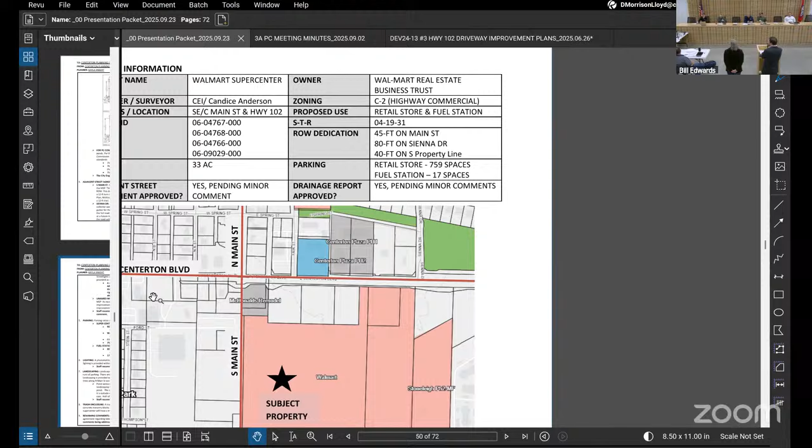Candice, what did you say your Walmart's ratio of parking was? 4 per 1,000 square feet? It would bring it down to under 4.0 if we had changed those into landscape islands, yes. So we're at 4.24 now. Yeah, it would bring it below. I'm on the islands. That's where I'm at.

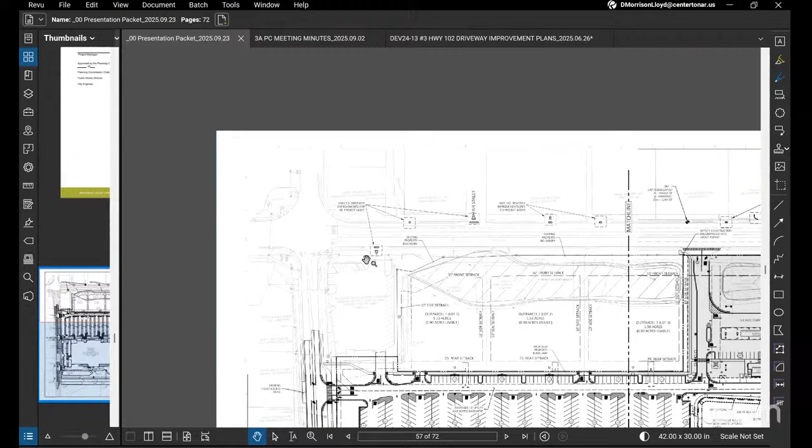Diane, can you unmute Mayor Bill, please? He would like to speak to the group. Hey, can you all hear me okay? Who's that? Mayor. Oh, okay. I can back off. Can you hear me now? Very good.

Hey, so I just wanted to add a comment. After we came back with the variance that they asked for, I was in contact with their liaison person, Michael, and Michael explained to me that Walmart does have a certain standard on parking based on the square footage. And I believe that's what Candice is trying to tell you. I would just recommend, it sounds like they've come back, they've done everything that we've asked them to do. And I would just ask, maybe we just approve it and let the staff finish it up and let's move on with this. That's all I got. Thanks, Bill.

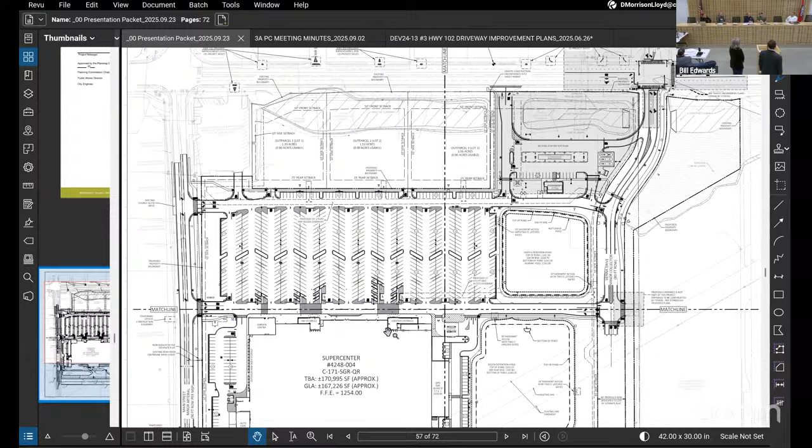Yep, we can vote. So let me ask you about the landscape, because one thing that I noticed, the islands that we saw previously are for 90-degree parking. This parking lot is set up at 60-degree parking. If you put landscape islands, right now you got sheet flow coming from the north to the south. Is it going to cause a regrading issue? It's not just as simple as putting an island. It affects other things that I don't think people consider. You can break it in the middle and flow it through. I'm just saying, that's my position.

We talked about this a while back. You've compromised with us. I'm okay. I would like to see more, obviously, but I feel like you have done due diligence to try to compromise with what we requested before. That's my position. I don't want to hold this up for 50 square feet of green space. That's my opinion. 3 versus 2 now, so now we just got to talk through the rest of it if that's what we want to do.

Here's something. Amber Alert.

No, I understand what it entails when you put curb and gutter on something that's designed already for your hydrology. Anytime you put a structure in front of hydrology, the water's gonna stop and go somewhere. Hey, Tony, how are they gonna? It's all draining to the northeast corner of that parking lot. In the middle, it does go north, but it would require a regrade. Yes. Requires some new spot elevations, for sure. That's just my position. I understand what it's gonna take.

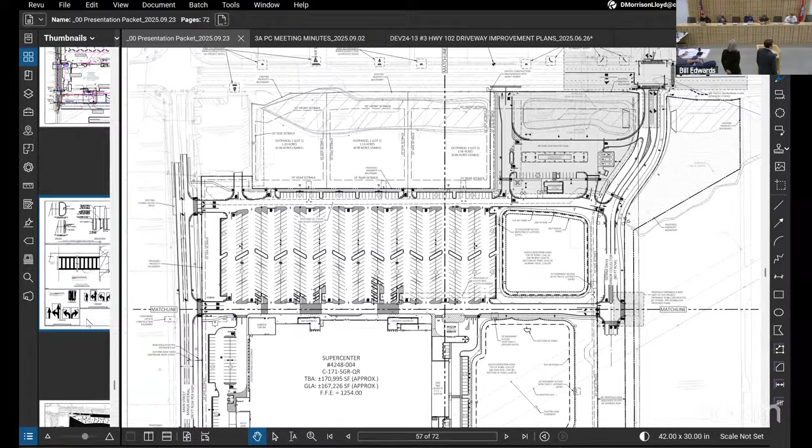So to try to keep us moving, on the three that support the islands, thoughts on additional landscaping instead? Or a combination? I'm open for discussion on that. I'm open for additional landscaping if they can meet some of my peers' desire to get more landscaping and put it elsewhere. I mean, we've allowed other projects to clump landscaping in certain areas so they can have valuable parking spots. We've done that in the past.

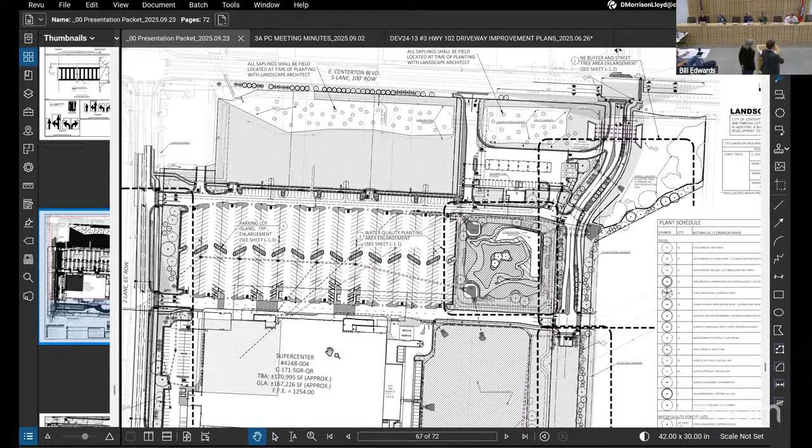There are some areas we can beef up. They're on the south side, along Sienna, on our first pond on the southeast corner. We can add additional on the south portion. We can add additional landscaping at that intersection, in addition to the south side of the new proposed or future road on the south side of the property. So when that road comes in, we can add additional landscaping along here, obviously not within the AEP easement. But we can add additional landscape there if you go west.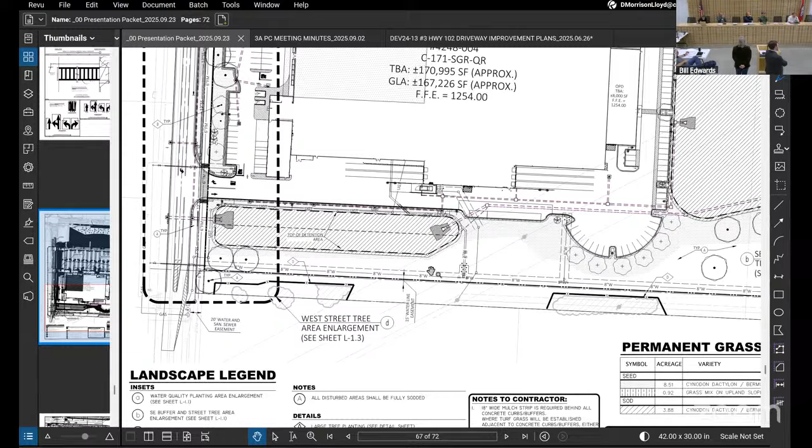Of course, outside of all these easements that are adjacent, we can add additional along this extension. So there are areas that we can beef up the landscaping surrounding the property. And to the outlots to the north, yes, they're gonna have a landscape buffer on the south side, eventually with their development, yes.

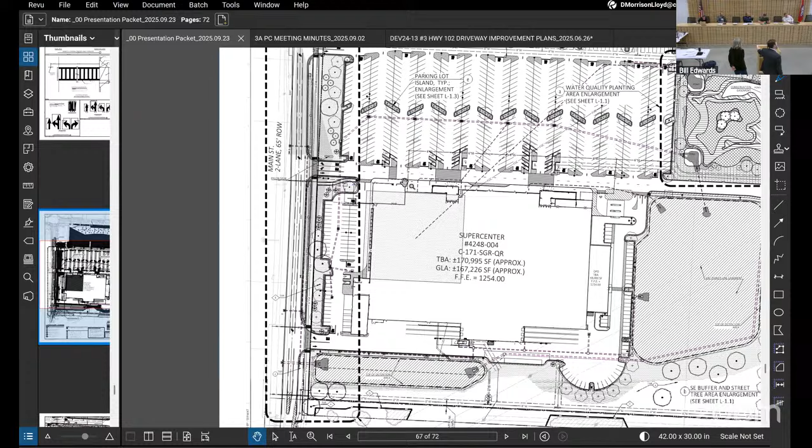Okay. So I'm gonna try to walk through, because I think what Curtis brought up, the fact this is kind of that start to the new downtown, if you will. So let's go to the west side, that would be on Main Street, right? So from an aesthetic perspective, think about it this way, Curtis, as people are driving down Main Street, if they're thinking about going to the new downtown, which is south of here, they're gonna pass by here. And I'm not an engineer, Will, so I can talk in layman's terms.

So they have put landscaping along here and trees and things that people will see. Now, there is some parking, but they're trying to block those, it looks like. So as people come down, there's gonna be some landscaping that people would see as they drive down into this thing. And then the piece of property that we're talking about, is it just directly south of here? Yeah, all of it. So then this new proposed road that would run behind this, there's an opportunity there to either beef that up or do some additional landscaping.

At the end of the day, you're still gonna see a building when you come in to that. We're not asking them any crazy things like colors; it looks like it's gonna be traditional Walmart colors. But people are still gonna see it. And in theory, as they get down through, they're not gonna see some of the parking. So think about it that way, if you can visualize that. It's kind of hard. We saw it in front of the neighborhood market in Rogers. It's already built, but that's trees and some aesthetics, right?

And then visualize it, and whether you should be excited or not about the stoplight, we are gonna gain that stoplight. And so if there's an opportunity to do anything there, as people are stopped, for them to see, just some food for thought. I'm just trying to help us move along a little bit. If you guys can visualize that a little differently than just thinking, gosh, they're gonna put a building, because people are gonna drive by here.

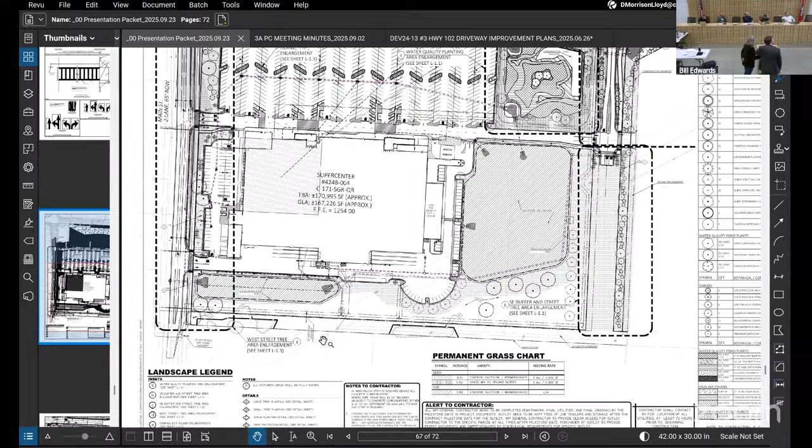Yeah, absolutely. And they're gonna see that versus an island, if you will. So they're gonna see the west side. So if there's an opportunity to beef some of that up, does that help? Because that's what people are gonna drive by and see, versus an island, and they may not even want to drive into Walmart. They might want to go to the neighborhood market instead. So I'm trying to help us move along and maybe compromise on something there. Does that help? Unfortunately, we just don't have the picture like we saw on the neighborhood market in Rogers.

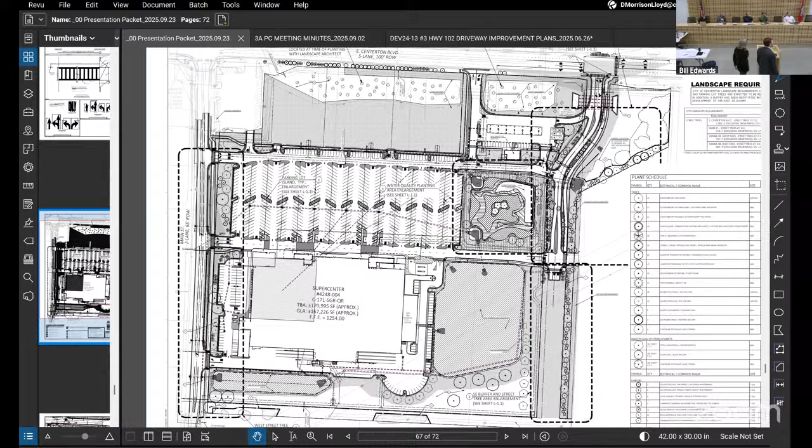So I will say to that point, there was an effort on this to minimize the visual impact of the sea of parking from outside of the site, from some of this exterior landscaping, particularly on the east and west. So that effort has been made already. Of course, it's hard to see from top down. But that is something that we tried to include.

We can also add, at the pharmacy, we could probably add some landscape at that pharmacy drive-through. It's a sea of stripes there. We can create that as a landscape island. The rectangle one, right there, yes. That's a bigger area where we can landscape, add some shrubs and trees.

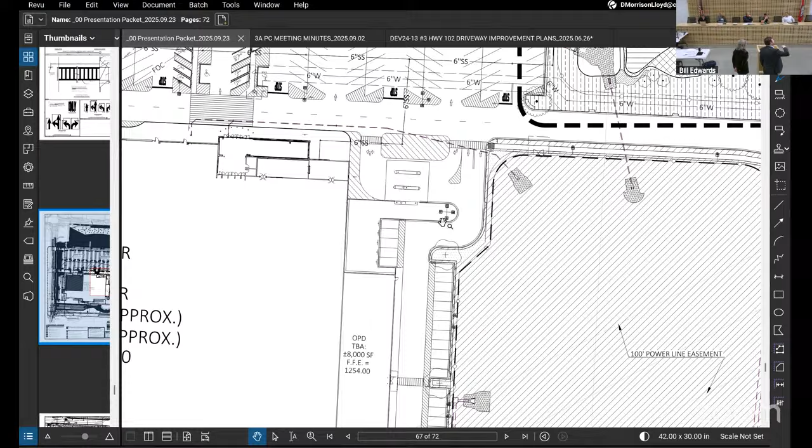And we've got a text exchange going with another CEI engineer, but there are, up near the McDonald's parcel, similar to the sort of jagged landscape island that y'all pulled up on Google Maps earlier, I think those two right there are the two that are large enough to accommodate that. No, on the south side of the drive. Those first two on the south side of that drive, the first two striped areas right there. Right there, yes, those two. The ones that you had mentioned, Joey.

Does that mean two now and then some additional landscaping? Is that the offer that's on the table? Well, I'm just trying to keep us moving here, Will. What we can do is the striped area in front of the pharmacy drive-through, we can landscape that and landscape those two.

That's a total of... The pharmacy doesn't really do much. There's no road down there. And there's no opportunity to landscape that section right between the entrance and McDonald's right there? That's a good spot. What is that? A sightline issue for turning right on the street. Yeah, sightline issues and also heavy utilities. You can see some easements there.

That's fair. So I think, just to run over here and point it out, for example, this one, I'm guessing, again, not an engineer, that one I'm guessing is too small for us to do anything with. Correct. And these two are large enough. Fourth one's still too small though. Yes. I'm still on 6. That's where I'm at. 6 on the north cap, not amongst what we just spoke about. 6 total on the north, yeah.

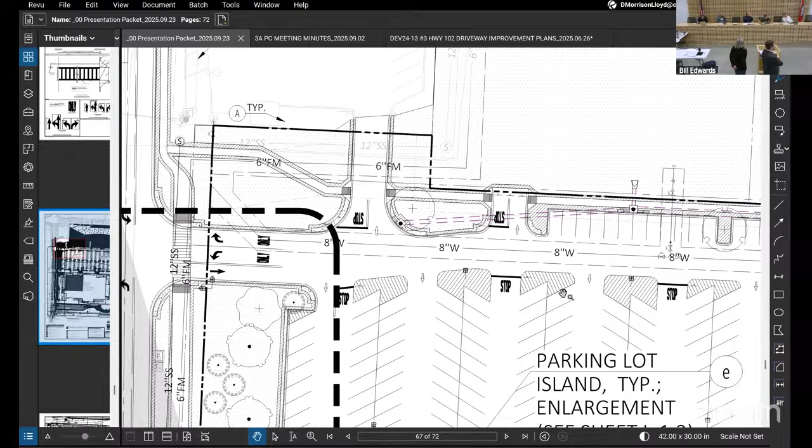At the entrance there. So there's four, Brandon, with the 2 additional here. Plus, even though Joey doesn't like it, the one at the pharmacy. And some additional landscape. I'm just repeating what Joey said. Does that help you guys out? Yeah, I hate to beat a dead horse. I guess my mind's still stuck on the traffic though. If it's just painted on there, people are just gonna drive over that and ignore the lanes. To me, that's a safety concern.

Understood. The larger islands have light poles in them. The smaller islands that we had discussed, those obviously have adjacent vehicles if vehicles were parked there. So the larger islands do have large light poles. How many islands have a light pole? 2, 3, 4, 5. 6 of them. I think there's 6. Brandon, are you still on 6?

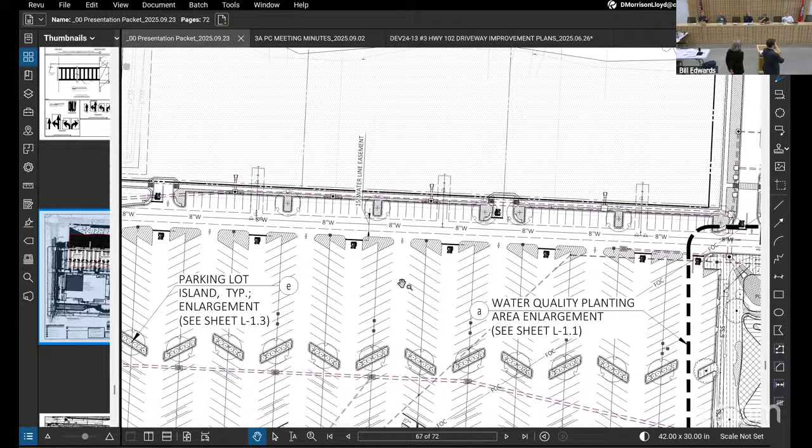Can we work with the light poles? It seems to be 6 right there. Leave the light poles. I mean, I'm with y'all. I really want to approve this and get this thing rolling tonight. Seems like we could work with those 6. What does that change with those large islands with the light poles in them? On the design side, we'd have to be very careful. Didn't you just say you could do one of those? Well, the one that has the large island, yes, those are larger than the other light pole islands. Okay. I don't believe that, but okay.

And what gets me, these are interior parking spots, not exterior parking spots. I would be more concerned if we had an issue with the exterior, the street frontage. The street frontage is covered. All we're debating here is interior. Let's vote. Let's just vote.

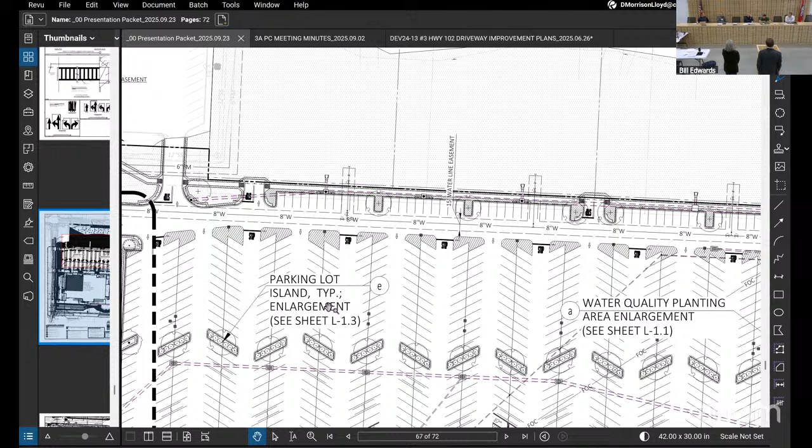So before we vote, it is a public meeting and I understand there's someone that wishes to speak from the public, so if you guys don't mind, we'll let them speak. It's not a public hearing, it's a public meeting, and so we do have to allow anyone that wishes to speak the opportunity to do so. Certainly. Thanks for the opportunity. I'm Cliff Thompson. My address is 116 Christian Lane.

Just listening to all the discussion, it seems like this was tabled once before. Some requirements were presented and it seems like they've come back and addressed the issues the best that they thought that they could. The concern I have is that this is a multi-million-dollar project. The company that's involved is investing a lot to add infrastructure to our city. Stoplights, road improvements, trails. There's also a lot of green space that is part of this property that they can't

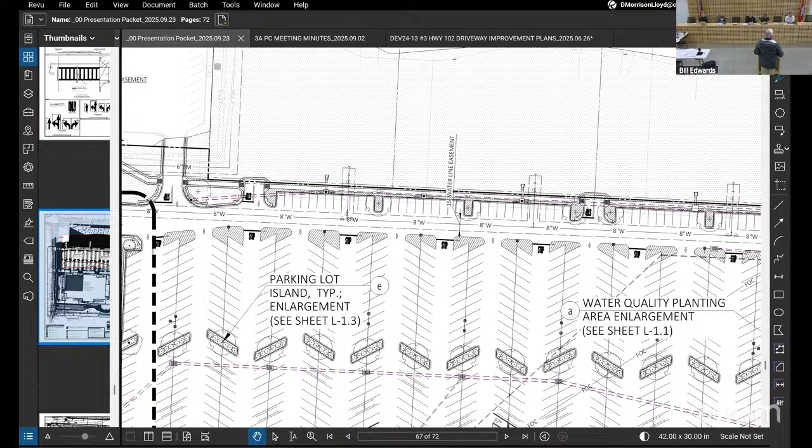do anything with anyway. And you're talking about, like he said, interior parking that's gonna be blocked by everything. You're not gonna see that driving down Highway 102. You're not gonna see that on Main Street. I think we're splitting hairs and causing a lot of undue hardship for a project that needs to be here. It needs to be here sooner rather than later because it's a catalyst for a lot more things to come to the city. And I think we're being a little bit ridiculous, to be honest. Thanks.

Cliff? Anyone else wish to speak? Wendy Hinton, 368 North B Street. I typically would not step up and speak to this, but on behalf of a lot of the residents that I know are waiting for this to come, I would ask that you guys be more open to considering what's already been presented. This is going to be great for our community.

I understand your reasoning behind it. We certainly don't want it to look like a big parking lot. But this is something that's been in the works for many years. And so I just want to speak on behalf of the residents that I've spoken to, that this is something that needs to happen. So I hope that y'all make a decision tonight that's in the best interest of everyone. Thank you.

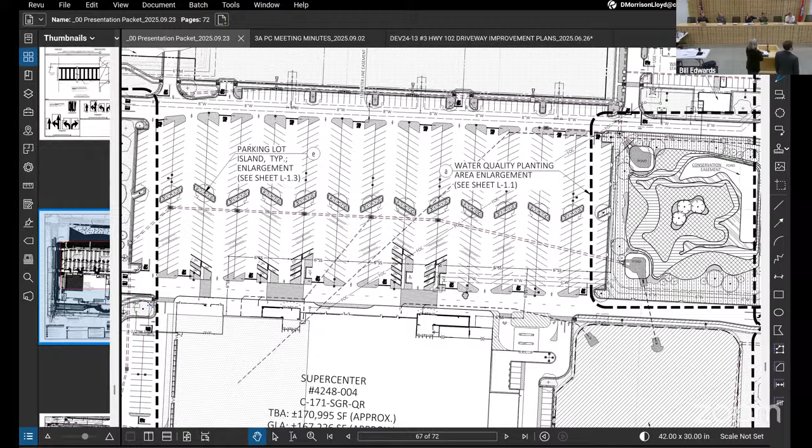So, Candace, would you guys think about keeping the two then? Bill, sorry. So would you keep the two that you offered up at the entrance there? Yes. And then alternating, and then do the southern pharmacy. Is that what's on the table now? I'm just trying to make sure, because Christian's over there trying to take notes for all this. When you say alternating, what do you mean, in addition to the two that we offered up? No, I mean, your thought process is alternate between north and middle. Is that what you're saying?

That would require a redesign, since that's how we had it proposed the first time, an alternation between end caps and islands. But since then, there's been other. Oh, there was nothing in the middle the first time we saw this, and you had the islands on the north. So that's why it was surprising today when we came back and we've solved this situation in the middle, but taken away everything that was presented the first time. The consideration we're speaking of is the discussion we've had with the planning department outside of the panel here. Gotcha. Never seen one that had end caps and landscape islands in the middle. At least two.

We haven't seen them, only staff. So I apologize for that. There's several different versions. Several different versions, several different years. So I think at this point, we know that we are able to landscape the pharmacy island. I understand that's not necessarily in the vein of what you're looking for. And we also confirmed we can do the two islands on the northwest side by McDonald's, and beyond that, we don't have much more authority to make a deal, and we also need to get a vote tonight.

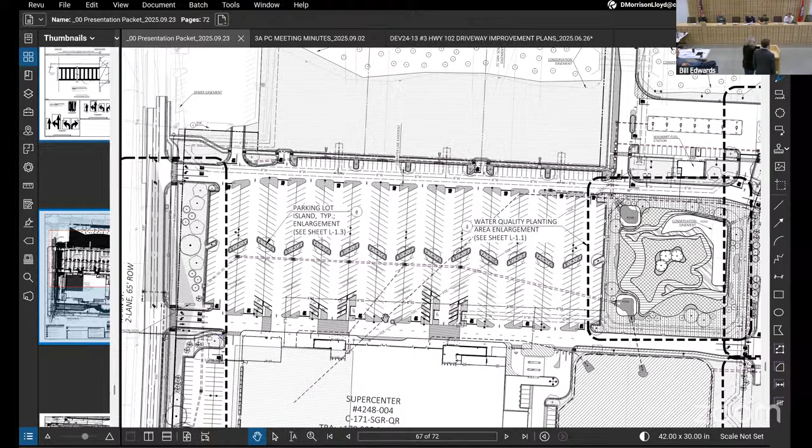So with that, I would entertain a motion for development 2413, the Walmart Supercenter preliminary plans and adjacent street agreement. Again, as a reminder, it's at the corner of Main Street and Highway 102. And the additional on the table is the two northwest islands that would be converted, along with the island at the pharmacy. And I'm gonna say discussion on additional landscape because it was hard to define tonight, but that's what was part of the discussion.

All right, this is Tony. I'll make a motion to approve development 2413 Walmart Supercenter preliminary plans as shown with the additions of landscaping islands, the two northwest islands, with additional landscaping at the pharmacy island. And a black fence around the detention, or decorative. Yeah, black with the decorative fence. Yeah. Is that everything? Yep. Brandon, I second. We have a motion and we have a second. You will do a roll call vote for me, please.

Curtis Ramsey, yes. Tony Davis, yes. Joey Engel, I'm gonna go no because, let me state my reasoning here. When we discussed this the first time, there were islands on the top, and what's presented tonight has less interior green space than what was presented the first time. Brandon Swoboda, I'm gonna go with the yes. And Jeff Seifert, I'm a yes as well. Awesome. Thank you, guys. Thank you all.

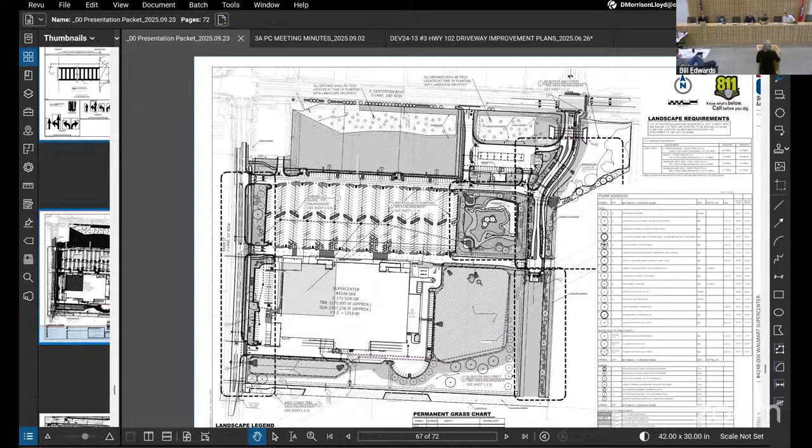All right, next, under announcements, our next planning commission meeting is the 7th of October. If you can't be here, just as a reminder, let us know. And I will see you before the next council meeting. Any other announcements from staff? I do want to give you all a heads up that Alan has worked on a lot of changes to the codes: sections of the streets, drainage manual, signs, Title 15. He had some comments and he did change it. So we are trying to get those summarized so that we can look at them and staff can look at them. I think we'll try to be on the second meeting in October, which is the 21st. So we'll try to get those in the Dropbox so that you all can be looking at them also.

What's the status on 15? Status on what? On 15. It's done. We're good to go. Yeah. We've been going since August. There's a lot of projects that got submitted before it was. And it's their submittal date that kicks them in? Okay.